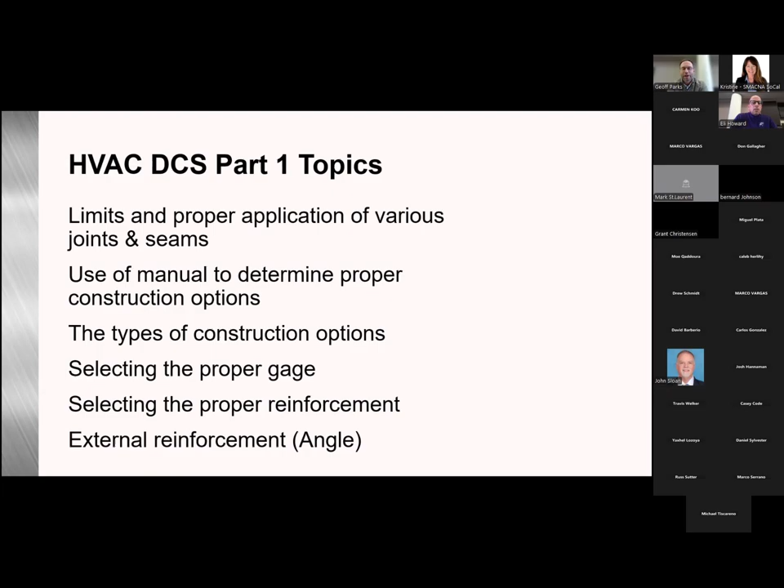HVAC duct construction standards, part one, topics. What we're going to review here: limits and proper application of various joints and seams, the use of the manual to determine proper construction options, the types of construction options that are laid out in the duct construction standards, looking to select the proper gauge based on the duct size and pressure class, all laid out in the duct standards, and selecting the proper reinforcements. For this first part, we're going to look at external reinforcement only, which would be angle.

So information required for duct construction: comprehensive duct layout indicating the sizes, design, airflow, pressure classes, and the routing of the duct system. The types of fittings to be used based on the designer's calculations of fitting loss, whether that's a square versus 45-degree entry tap, conical versus straight tap, and so forth. The use of turning vanes or splitter vanes. Locations of access doors, locations and types of control and balancing dampers, the location and types of diffusers, any requirements for duct insulation, the location and type of fire protection devices, including fire dampers, smoke dampers, combination fire smoke dampers, and ceiling dampers. This is something the building codes require - this information needs to be on the design documents submitted for building permit. And then, of course, details of any offsets required to route ductwork around obstructions, columns, beams, and so forth.

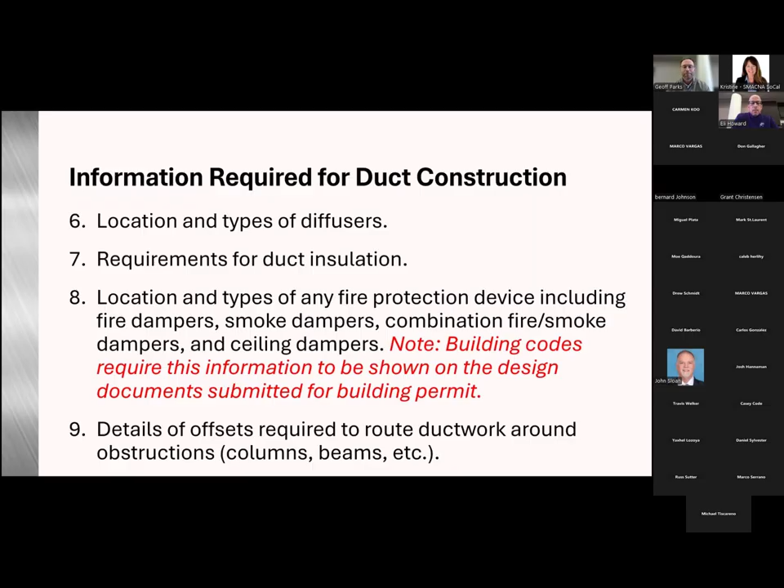So what kind of design considerations are on the engineering side? Of course, the CFM, you have your static pressure, duct size, fitting types, which we talked about. And then that static pressure will end up becoming your construction pressure class.

So on the contractor side, some duct construction considerations, of course, the pressure class, which is as specified, the panel width and height. And then with that information, we'll be able to go into the duct construction tables, find our panel thickness, the gauge, be able to select our joint type based on spacings, and then looking at any intermediate reinforcement requirements that there may be.

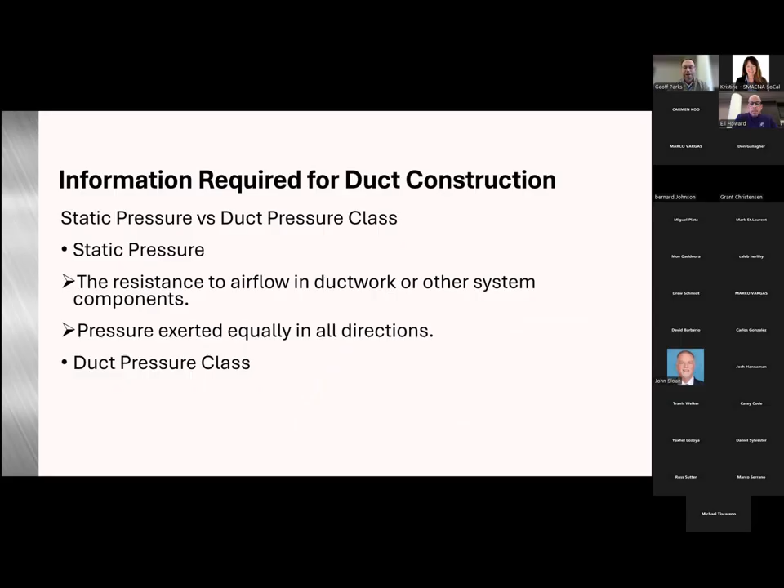So static pressure versus duct pressure class. Static pressure is the resistance to airflow in the ductwork or other system components, and this pressure is exerted equally in all directions. Duct pressure class qualifies the duct construction requirements, and then it clarifies the duct sealing requirements. Again, both of these values are determined by the professional of record.

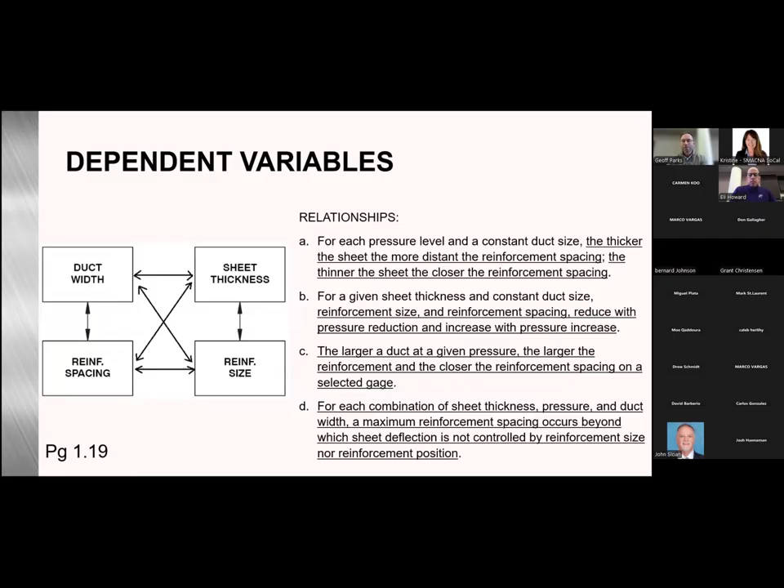Dependent variables. This is, you guys don't have books. I'm used to people having books here.

This is figure 1-2, dependent variables, and you're able to choose the combination for specific system requirements. First, maybe you're going with a thicker panel gauge, which may allow smaller reinforcement sizes or less reinforcements. Or you beef up the reinforcement, allowing a thinner panel gauge or fewer reinforcements. Or you add more reinforcements or shorten the spacing, allowing a thinner panel gauge or smaller reinforcements. These are laid out in the duct construction tables.

Just transverse joints. These are the joining of two duct sections, which can be any branch, sub-branch intersection, duct collars, taps, louvers, air terminal connections, and so on.

Here we're just showing a couple of typical rectangular transverse joints, drives, plain slips, TDC, TDF, but we're going to get into all the available options in the standard.

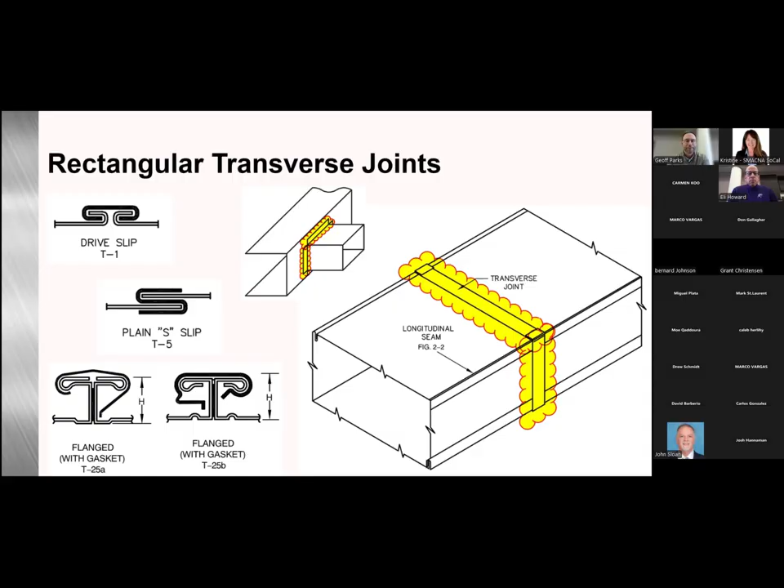Here we have figure 2-1. This is the rectangular transverse joints covered in the document. Let's dive into a couple of them.

Here we have the T1 drive slip, T3 reinforced. This is going to be a gauge no less than 2 gauges less than the ductwork. It has a minimum gauge requirement of 24 gauge, and it qualifies as a reinforcement per table 2-48, which we will look at in a little bit.

One of the reasons we've laid this table out like this within the new duct construction standard is we found that most contractors, if they made a mistake in their layout and fabrication of ductwork, it wasn't the panel gauge. It was usually taking the transverse joint beyond its usable limit listed in the standard. For example, you're not allowed to use the T1 drive slip, even reinforced, above 4-inch water gauge. So there are limitations, and we thought taking them out of the body of the manual and highlighting them would be beneficial for all contractors working with this.

If you use our duct construction app, the unique thing about it is if you put in the size of ductwork and the pressure classification, and the pressure was high enough, it would not even give you an option to use these transverse joints. It would say, you're at 4-inch water gauge, your ductwork is 60-inch by 24, you're going to be using TDC, TDF. You can't even use this joint, it wouldn't even pop up as an option. So that's where we found people were making mistakes, and that's why we focused on those couple of areas in the book and also with the duct construction app.

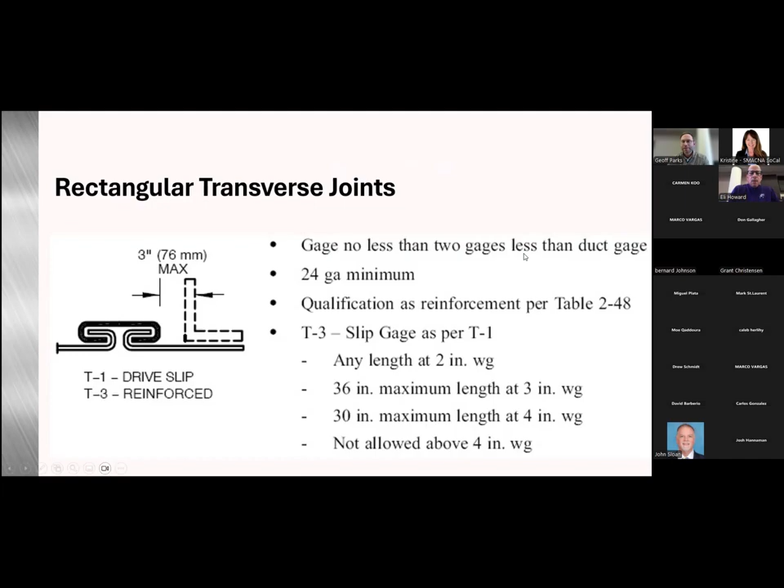Moving on with this one: this is good up to any length at 2-inch water gauge, 36-inch max length at 3-inch water gauge, 30-inch max length at 4-inch water gauge, and it's not allowed above 4-inch water gauge.

Moving on to the standing drive slip, the T2. You would want to fasten the standing portions within 2 inches of each end and elsewhere at 8-inch spacings or less. It's good at any length up to 2-inch water gauge, 36-inch max at 3-inch, 30-inch max at 4-inch, and not allowed above 4-inch water gauge.

Here we have the plain S slip, T5, as well as the T6. This one is not less than 2 gauges less than the duct gauge, 24 gauge minimum. When used on all 4 sides, you'll want to fasten within 2 inches of the corners and then at 12-inch maximum intervals. This is only good up to 2-inch water gauge maximum pressure, and as pointed out, this wouldn't even be an option if you selected 4-inch water gauge in the duct construction app.

Next we have the reinforced S slip, the T7. You would use S slips conforming to the T6, which we just reviewed, and then use a 16 gauge angle, 1x1 height, sliding it into the pocket and fastening with screws at the ends. This angle can be used for A, B, or C class rigidity, and again maxes out at 2-inch water gauge.

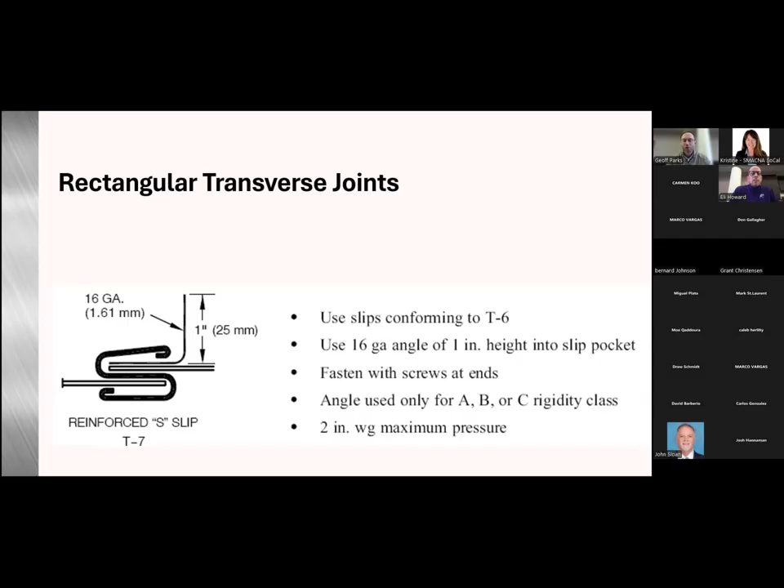Next up is our T8 double S slip, 24 gauge for 30-inch wide or less, 22 gauge over 30-inch width, and then we would fasten each section of the duct 2 inches from the corners, and then at 6-inch maximum intervals with 5/8 minimum tabs to close the corners.

What I'm showing here is table 2-47, since we were just reviewing flat slip type connections. This is the unreinforced duct table. What this table does is combine all of the unreinforced minimum duct gauges from all the tables, up to 48-inch duct width and up to 10-inch water gauge. Once I get into the duct construction tables, I'll show you the column that correlates with this table.

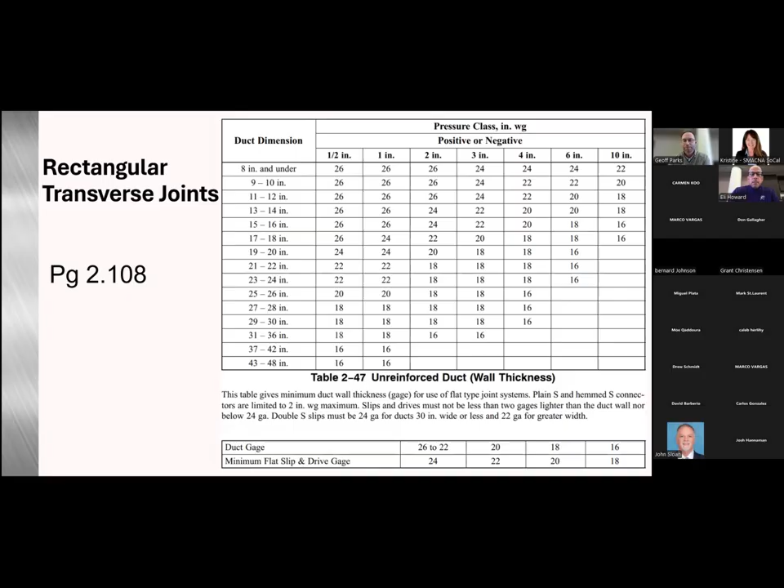Here we have table 2-47. I mentioned briefly when talking about the T1 flat drive accepted as reinforcement. For this table, based on the duct gauge that you would get from the duct construction table and the static pressure you're working with, if you're within the meat of the table and the width of the duct and reinforcement spacings work out, then this T1 flat drive would be accepted as reinforcement. I'll use this in an example coming up to further explain how it works.

Moving on with rectangular transverse joints, getting into our standing S, our T10s, T11, T12. When using on all 4 sides, you would want to fasten within 2 inches of each corner, and then at 12-inch maximum intervals. Again, this has the same limitations as the other transverse connectors we looked at: good up to any length at 2-inch water gauge, 36-inch max length at 3-inch water gauge, 30-inch max at 4-inch, and not allowed above 4-inch water gauge.

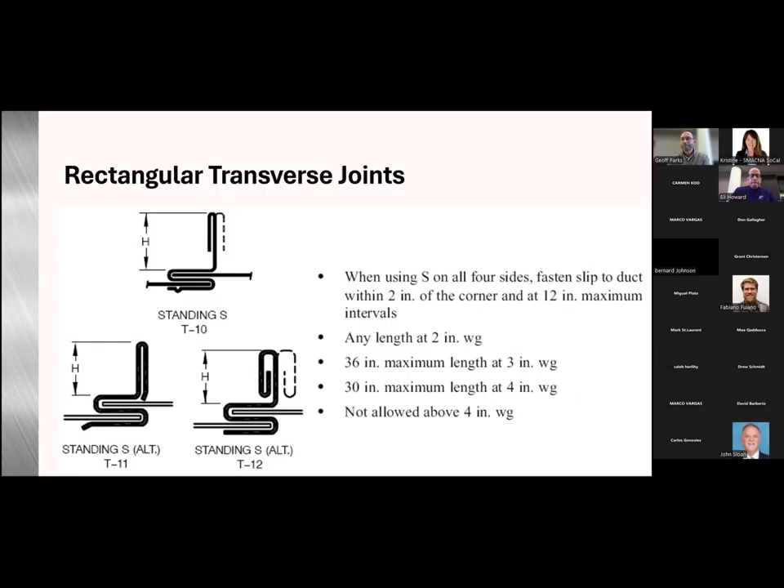Now we're looking at the T15, T16. This is our standing seam or the angle reinforced standing seam. You would button punch or otherwise fasten within 2 inches of each corner and at 6-inch maximum intervals.

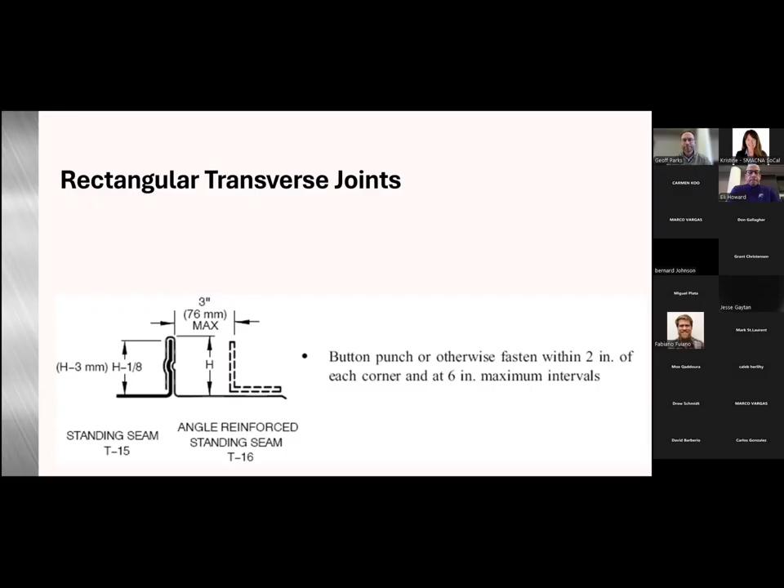One thing to note is that per the International Mechanical Code, the height maximum would be 1/2 inch for grease duct systems, type 1 grease ducts. That also applies to the UMC, because the UMC does reference NFPA 96 for kitchen grease duct systems, and they max you out at a 1/2 inch flange turnout.

Now we're looking at the T22. This is companion angles, Van Stone flanges. You're going to have a 3/8-inch minimum flange on the duct, and the angles must have welded corners. They're going to be fastened, either with tack welds, bolts, or screws to the duct wall, 2 inches from the ends, and then 12-inch maximum intervals. There's a little bolt schedule down here: 5/16 minimum diameter at 6-inch maximum spacings for 4-inch water gauge or lower. 1/8-inch angles require 4-inch maximum spacings at 4-inch water gauge, and then 4-inch maximum spacings at higher pressures.

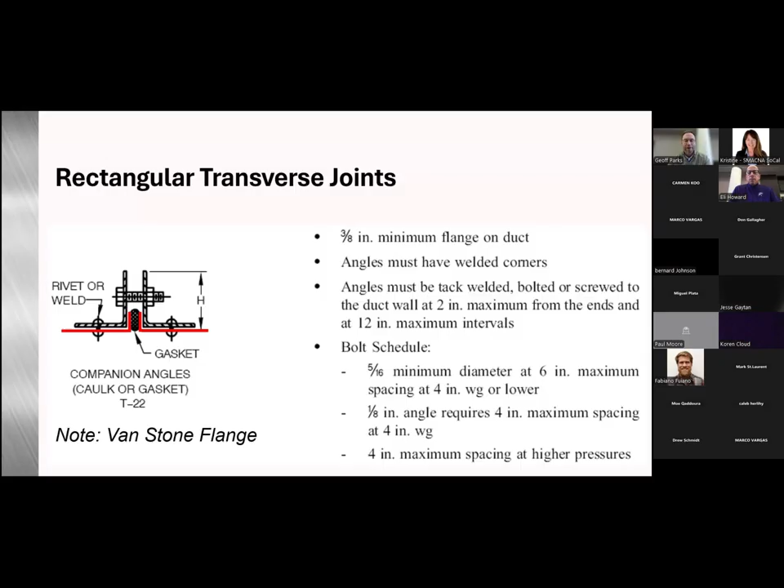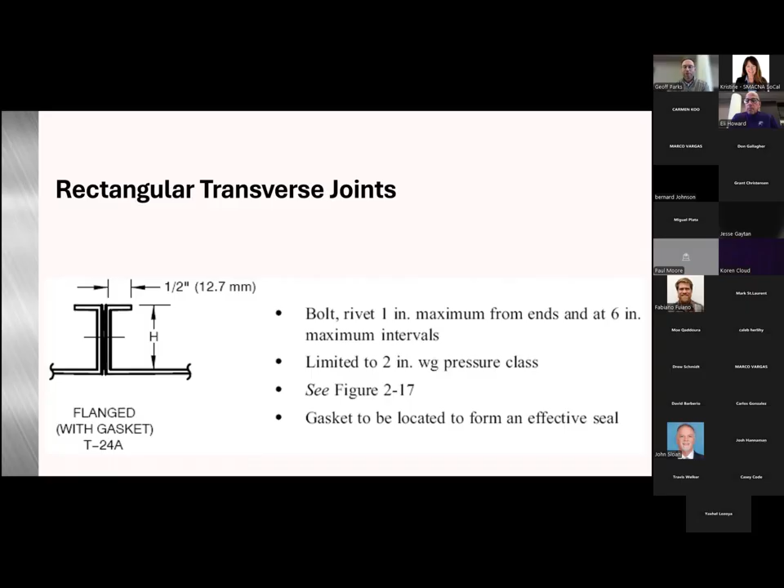Here we have the T24A. So this is T24 light, if you will. This one is limited to 2-inch water gauge, bolt rivet, 1-inch maximum from the ends, and then 6-inch maximum intervals. And we're going to follow figure 2-17 for this one as well.

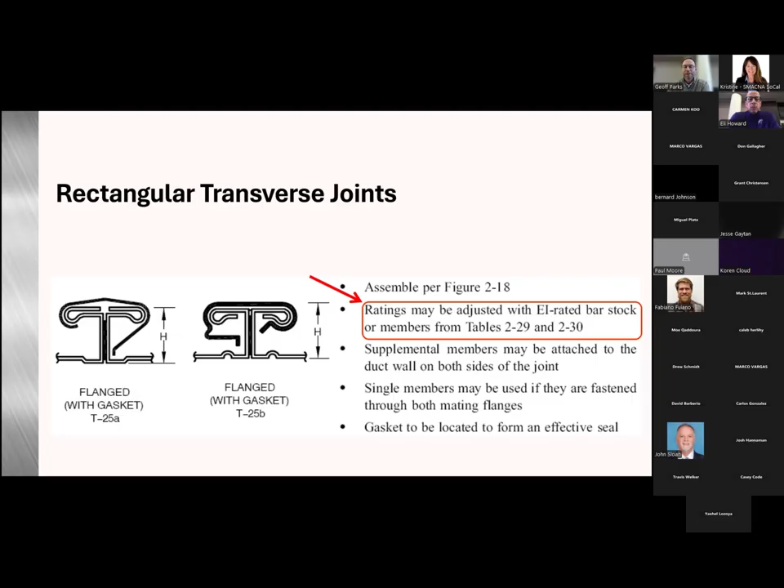Here we have the T25A, T25B. This is your TDC, TDF connection. Assembly is going to be per figure 2-18. Ratings may be adjusted with EI rated bar stock or members from tables 2-29 to 2-30. That just means you can add supplemental angle or exterior reinforcements to beef up that rating or reinforcement class for that joint. Single members may be used if they're fastened through both mating flanges, with gasket for an effective seal.

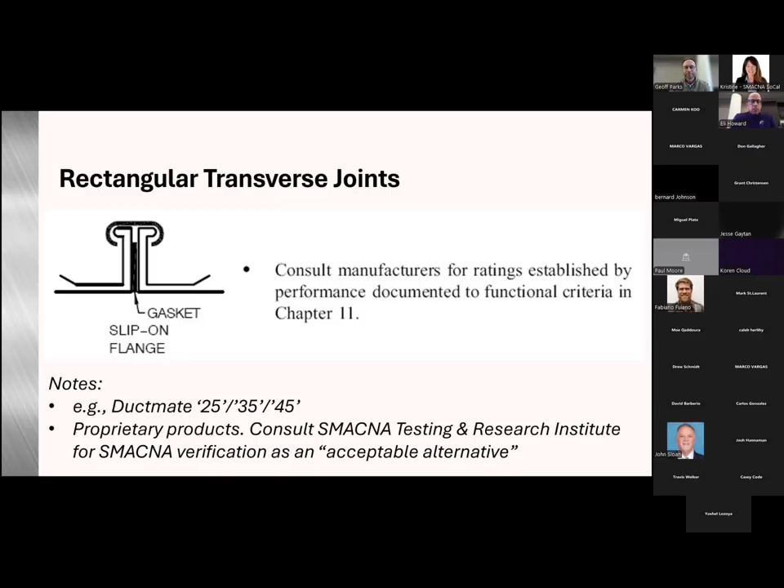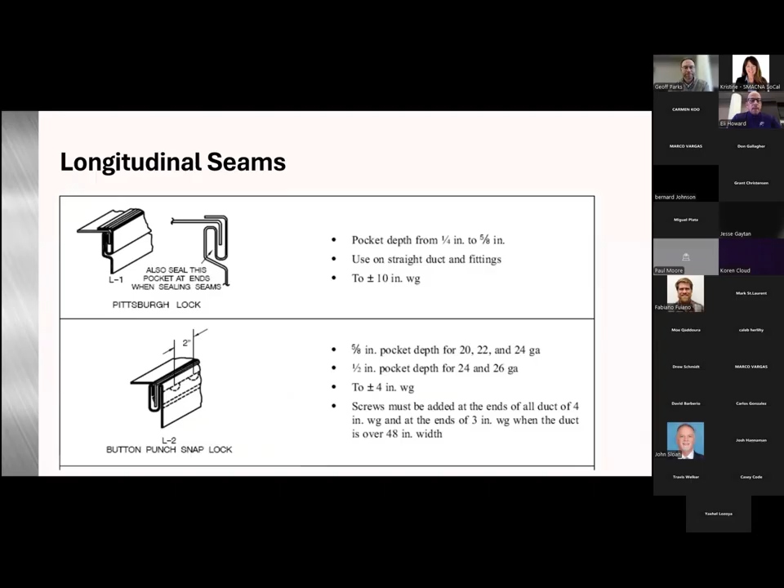Next, we have the L3 groove seam, also called the flat lock or pipe lock. Typically you would see this on round duct as well, but it can be used as a rectangular seam. And then we have the L6, excuse me, double corner seam. Both of these are good for positive or negative 10-inch water gauge.

Next, we have the L4 standing seam, good for positive or negative 10-inch water gauge, 1-inch minimum seam. This can be used on the duct interiors, and your fastening requirements are going to be 2-inch maximum from the ends, and then 8-inch max intervals.

Next, we have our L5 single corner seam. You would follow all the fastening requirements for the L4. And then next is the T25A, T25B, which can be modified for longitudinal seam applications, joining large panels or big duct. You can join that very, very efficiently with TDC, TDF.

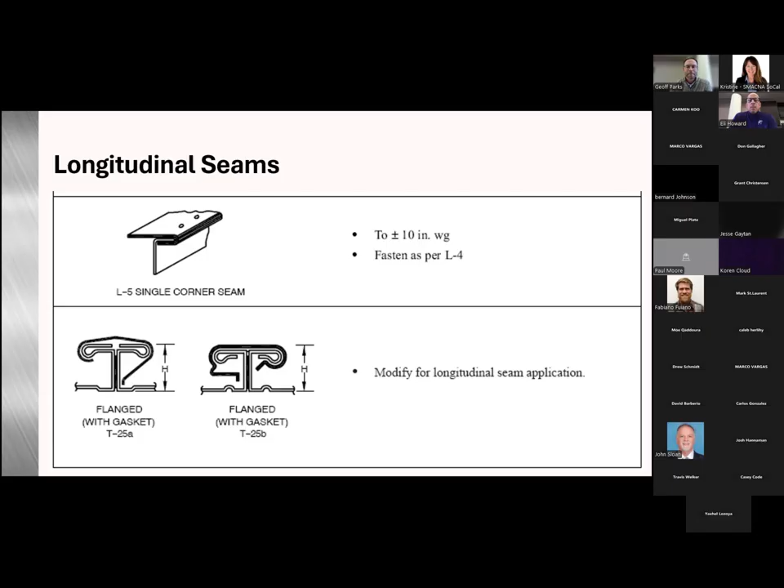All right, moving on. So we covered our joints, we covered our seams. Now we're going to look at intermediate reinforcement that's covered in the standard. This is going to be your angle, hat channel, channel Z, and then framing channel or unistrut.

And just to note, other structural shapes may be used for external reinforcements when the equivalent effective stiffener rating, that EI rating, can be demonstrated.

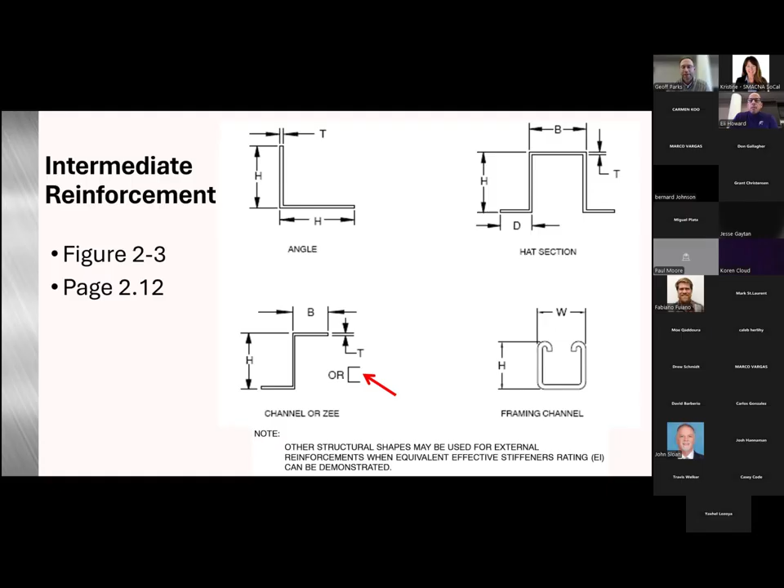So now we're going to talk about basic duct construction process. We're going to walk through the steps of how to go about building some ductwork.

So first off, you're going to want to verify the pressure class. Next, we're going to want to check the corresponding table, make sure we're looking at the correct duct construction table. From there, we would start with the larger side.

Next, we're going to determine our reinforcement spacing options, and these can either be a joint reinforcement or intermediate reinforcement. Next, we would check the joint reinforcement tables, and check any intermediate reinforcement tables if applicable.

For this part one, we're only going to look at external reinforcement. And in the next part, we would look at tie rod options for reinforcements. Then we would repeat for the short side.

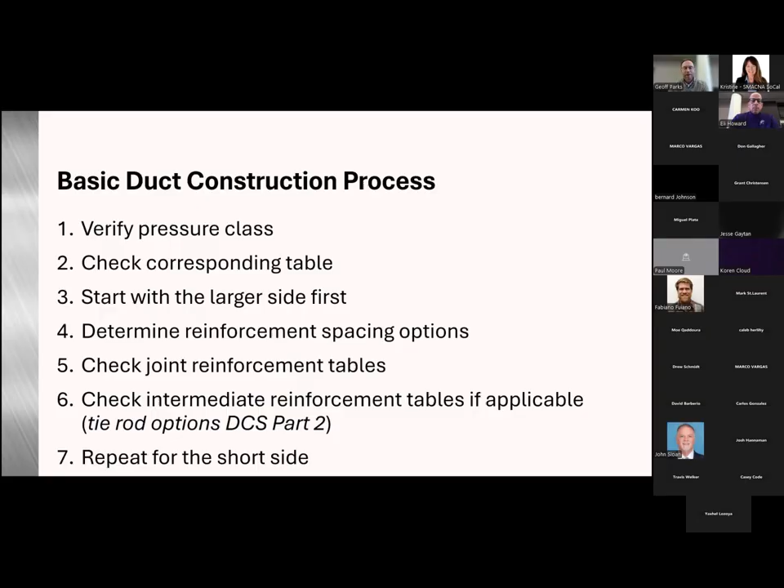So here we have the reinforcement tables guide summary. What this does is it basically spells out and tells you how to read the duct construction tables, and we'll dig into this one a little bit closer.

So first off, point out the large rectangle that's kind of encasing the circles here. We have 1, 2, 3, 4 through 10. So basically those circles are column numbers, and there's really no technical merit to them. They just identify each column.

Next, looking at the first letter in the table - hopefully you can see my mouse swirling around there - this is going to be the minimum reinforcement class required. And then the number in the box, that's going to be the minimum gauge based on the reinforcement spacing that you select, which in this case, we're looking at the highlighted ones, and that's going to be the 8-foot reinforcement spacing options.

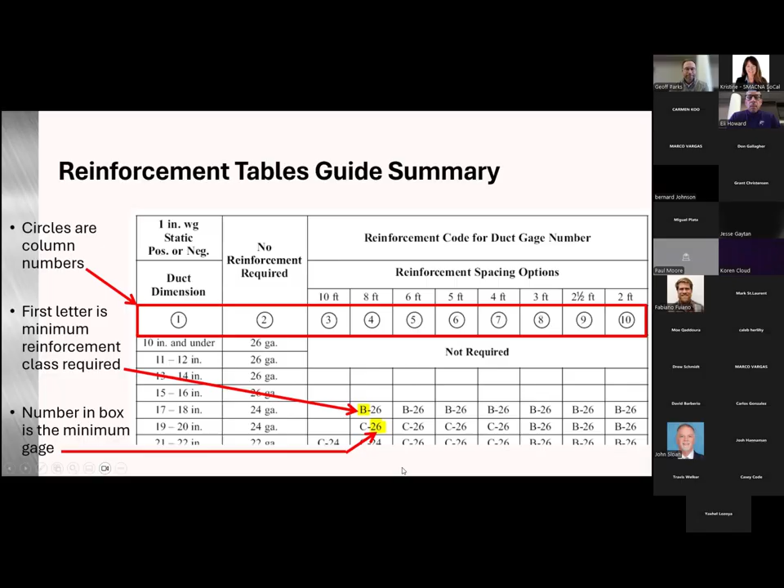So digging into the tables a little bit more, if you see a second letter, that is a downsized reinforcement when tie rods are added. So you could downgrade or downsize from an I reinforcement to a G reinforcement, highlighted here, with adding a tie rod. And then down in the lower right-hand corner, we have a KT - that T means a tie rod is required for that to qualify as a reinforcement.

So kind of summing up what's in the box and the tables. This one, we have an H20G. This means that the minimum panel gauge is going to be 20. The reinforcement required is an H at the spacing noted at the top of the column, and again, this can be a joint or intermediate reinforcement. And then the second letter, which is the G, means that you can downsize from an H if you use a tie rod as well.

And I'll say that I think there's an example that I'll be able to point out. But if to achieve a G class you're already required to use a tie rod, then that option would not be available. I'll make sure I point that out when we get into a couple examples here.

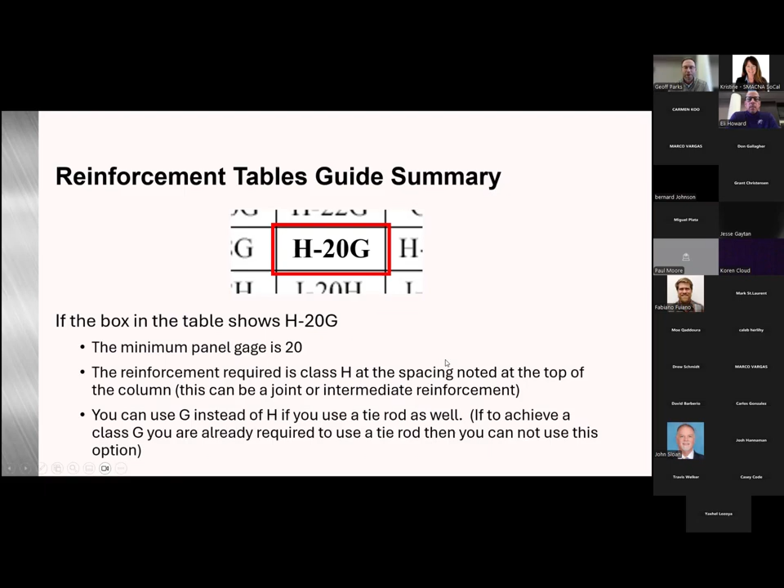So what we're going to do is just quickly review what we just went over, looking at an actual duct construction table. This is the 2-inch water gauge, and this is good for positive or negative pressure. Here we have our column headers.

The second column in, this is the no reinforcement required. So this column at the gauge shown wouldn't require any additional reinforcements. And again, this ties back to the other table that I showed that kind of correlated all of the no reinforcement required gauges for the 2-inch up to 10-inch water gauge as well.

Next, we have our reinforcement spacing options, 10 foot, 8 foot, 6 foot, down to 2 foot.

So for a quick example, say you have a 24 by 24 duct, you go 18 gauge, no additional reinforcements would be required. But let's say we don't want to build 18 gauge, so we're going to look at 5 foot joints. This is saying, hey, we can get away with 26 gauge, but we have to add something every 5 feet. And what this table is telling you, the box is telling you, you need a D class reinforcement every 5 feet to go down to the 26 gauge from the 18 gauge.

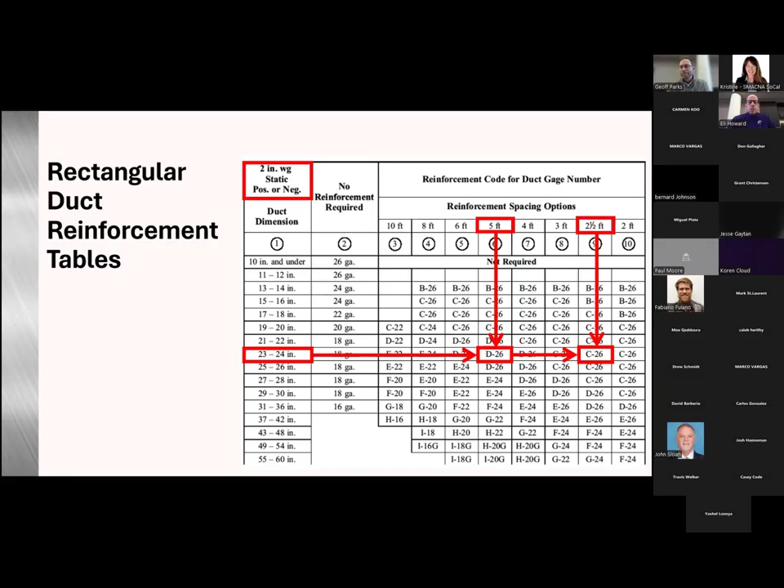And then we can look at it further by going to the intermediate or mid panel. So now we've reduced to a C class, going every 2.5 feet versus the 5 feet.

So quickly, I'll just come back to this dependent variables. What we just went through was a progression of changing variables. Originally, we had our 18 gauge. We looked at adding reinforcements, so we went to the 5 foot, dropped us from 18 to 26. And then further shortening up that reinforcement spacing down to 2.5, we were able to drop from a D to a C class reinforcement. So this is just kind of the progression of changing variables.

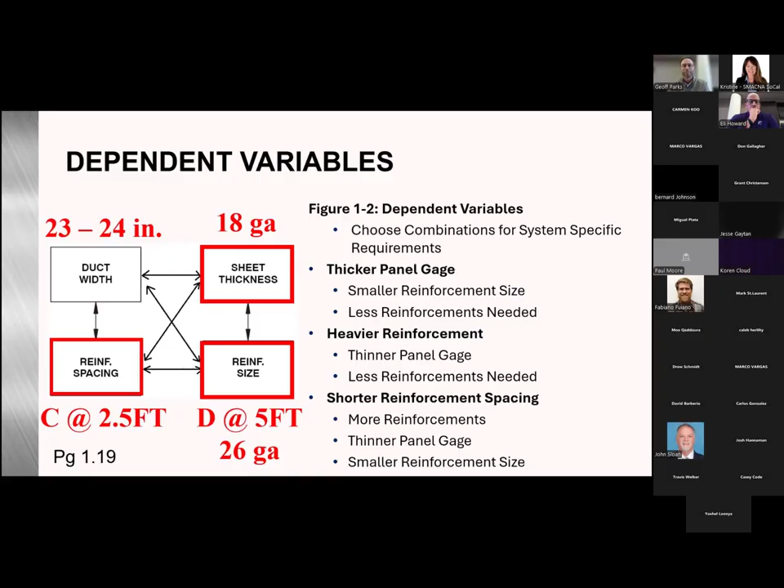And then here we have, I'm just showing, basically your 6 foot would be a 3 foot mid panel, 5 foot would be 2.5, 4 foot would be 2, and so on.

Okay, so now we're going to look at joint reinforcements. This is table 2-31. It covers all transverse joints that qualify as a reinforcement, except for the T1 drive.

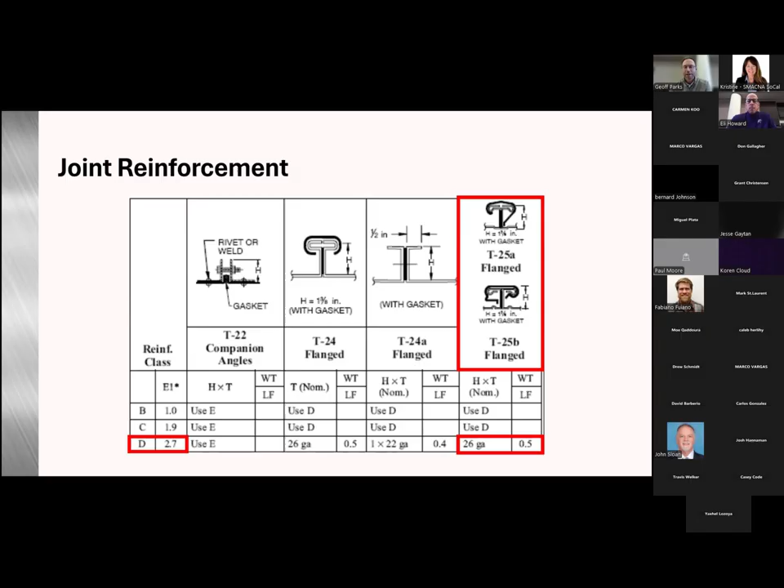A couple other things to point out. If you see a plus sign in parentheses, this means that option is only available for positive pressure only. If you see a capital R in parentheses, this means that a tie rod is required for that joint

So now that we've kind of walked through pretty quickly a bunch of the duct construction tables, how to read them, joints, and so on, we're going to get into an example.

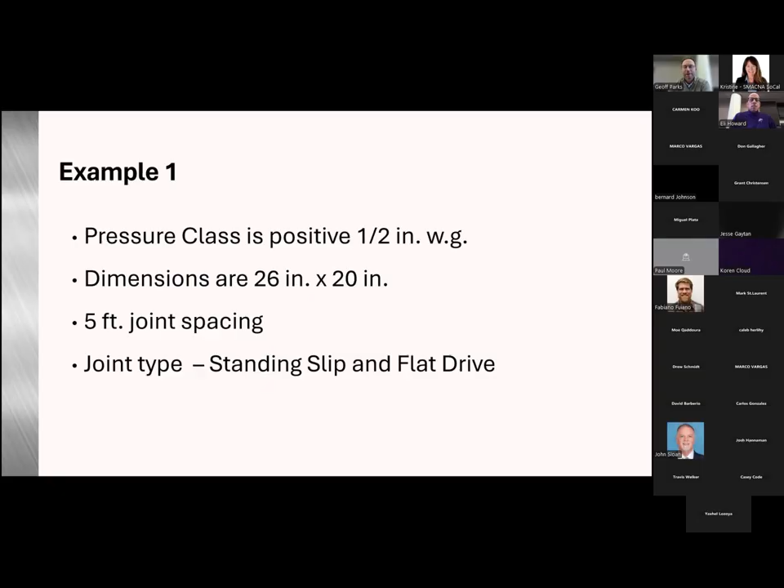So here we have a positive pressure half-inch water gauge system. We have a duct dimension of 26 by 20. We're going to be building 5-foot joints, and the joint type is going to be a standing slip and then a flat drive.

So what we're going to do is make sure we go to the correct table. This is going to be table 2-1, our half-inch water gauge. We're going to check our large side first, which is the 26-inch.

Right out of the bat, we can see that if we build it out of 20 gauge, no additional reinforcements would be required. And we could make really any joint length that's feasible. So there's no joint length restriction with this at this gauge.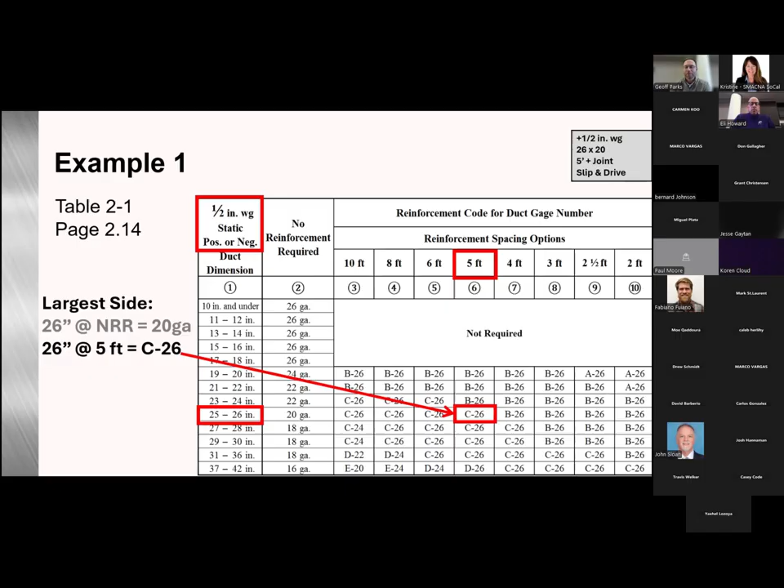But most everybody's going to build a 5-foot joint. We're building a 5-foot joint for this example. So we're going to look at the 5-foot reinforcement spacing column. What this is coming up to is a C26. So we would need a C-class reinforcement every 5 feet, minimum duct gauge 26.

So now looking at the short side, the 20-inch, no reinforcement required would be 24 gauge. Our 5-foot reinforcement spacing option is going to be 26 gauge with a B-class reinforcement. So B class, 26 gauge.

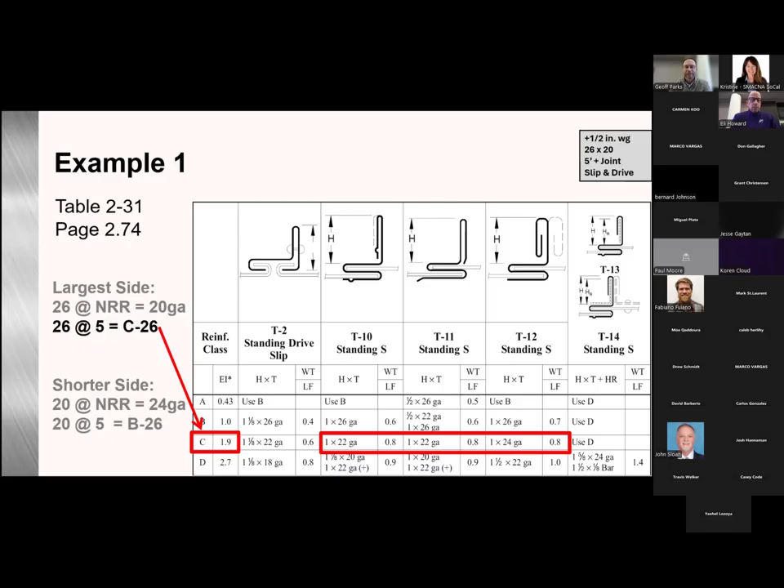So now that we know that from the duct construction table, we need to go to table 2-31, check out our joint reinforcement table. We need to find out what qualifies as a C class. So what we have here for the 26-inch side are a couple options on the T10, T11, T12. Any of those options would be available to qualify as a C class at 5 foot.

Now looking at the T1 drive slip side, I mentioned earlier that this qualifies as a joint reinforcement per table 2-48. So now we're going to jump back to that table to see if we qualify.

So here's 2-48. We're looking at our short side, which is the 20-inch side. It's a B26, 26 gauge is the column we would look at. And then we can see that up to 20-inch width panel at a maximum 10-foot reinforcement spacing, this would qualify and be accepted as a reinforcement.

If we drop down to 18-inch duct, say it was 26 by 18, no reinforcements would be required, and it would be acceptable as well.

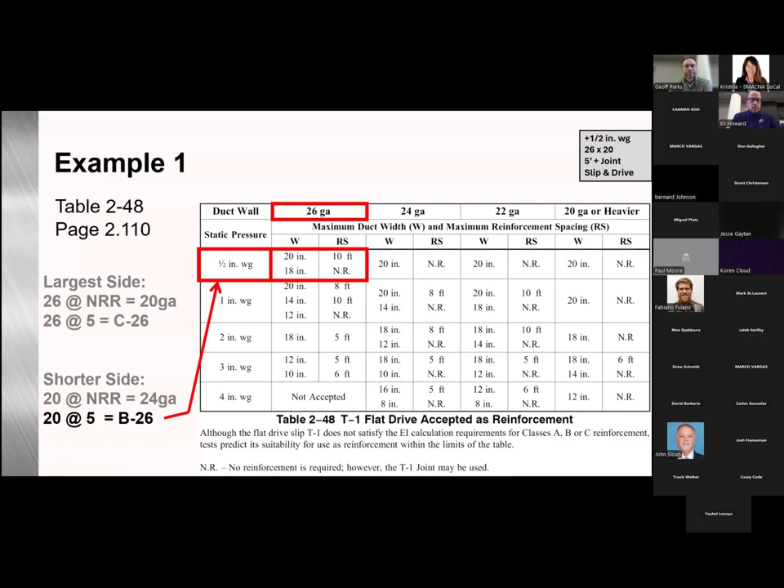So our solution for this first example: option 1 would be build it at 20 gauge, no additional reinforcements would be required. Option 2, we could build it at 26 gauge with a joint reinforcement spacing of 5 feet, and then that joint reinforcement for the 26-inch side would be a C class.

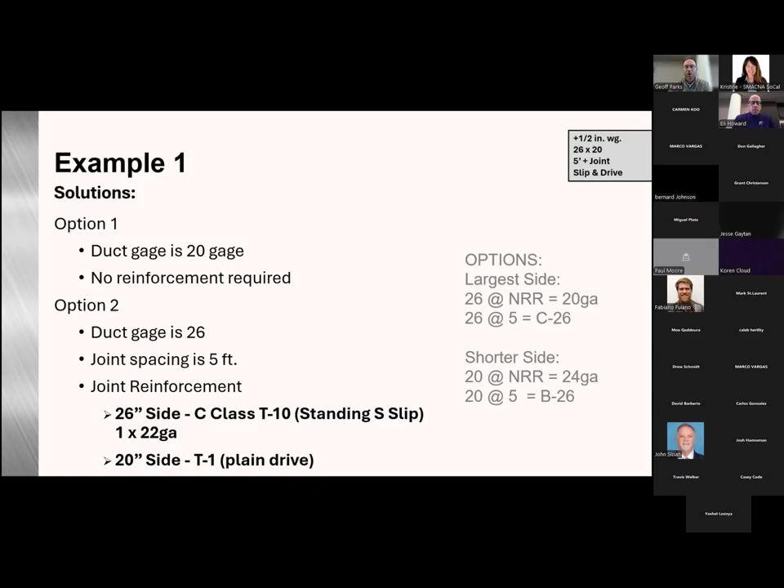T10 standing S slip would be 1 by 22 gauge. And then on the 20-inch side, the T1, we could use the plain drive since we qualified that in table 2-48.

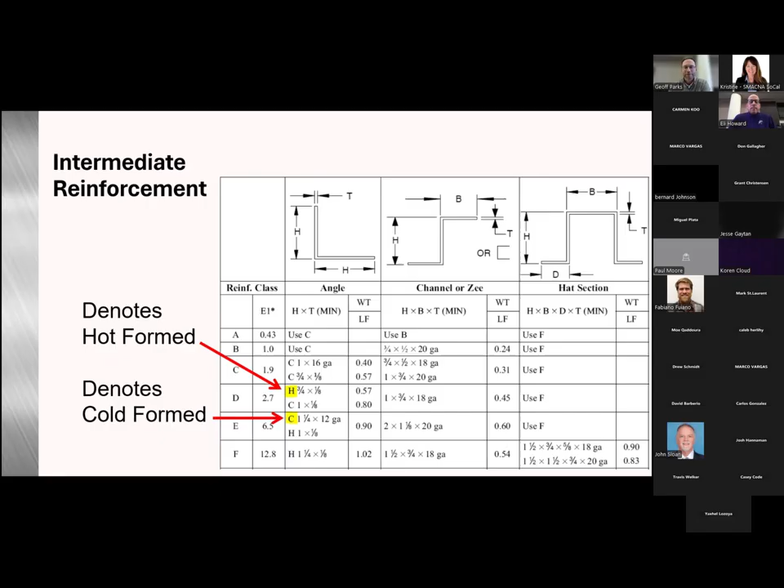All right, so now we're going to look at example 2. This time we're bumping up the pressure class. We're going up to 2-inch water gauge, getting a little bit bigger duct here. We're going to look at some 60 by 26, 5-foot joints, TDC, TDF, and no internal reinforcement, simply because we're just looking at external for this first part.

So now we're going to jump to table 2-3. This is our 2-inch water gauge table. You want to make sure you're always looking at the right table, because that has happened before—people have thought they were building it off the right table, and lo and behold, they didn't. So always verify you're on the right table.

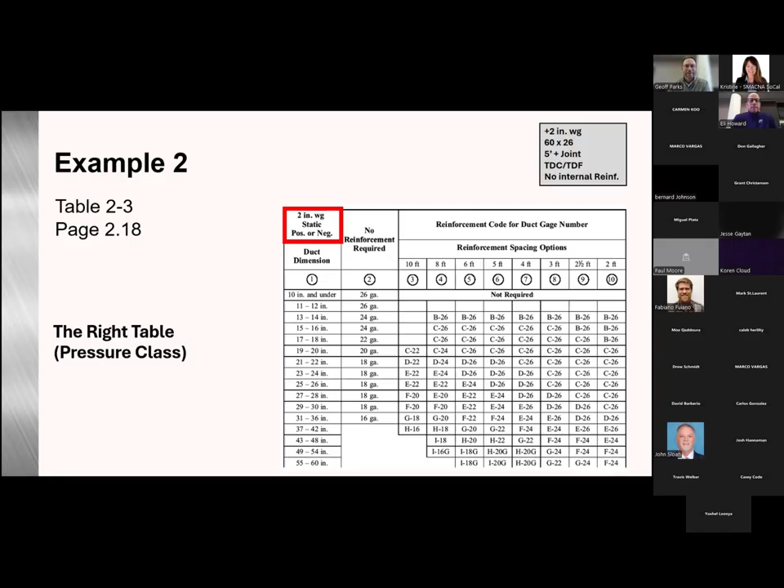So now we're going to look at our long side first, 5-foot joints. This 60-inch side is telling us we need an I-20G. And then we could also look at our intermediate or mid panel, which would be the 2.5-foot reinforcement spacing. And that's telling us we would need a G24 in the green box there.

So now we're going to jump to our joint reinforcement table, table 2-32. We're going to check our TDC, TDF, see what the minimum requirements are for the I. And that's telling us that it's a 20 gauge with internal reinforcement—that's that R in parentheses.

So for this example—whoops, I went the wrong way—we are avoiding internal reinforcements or tie rods purposely. So we would look at the 2.5-foot spacing. That was a G24 from the table. And that's telling us, hey, we need 20 gauge. So you can see the duct construction table said at 2.5-foot spacing it's a G24, but when you come to the joint reinforcement table, the minimum gauge is going to have to be 20. So that would supersede the duct construction table. And since it's a formed on flange, you would have to build the duct out of 20 gauge.

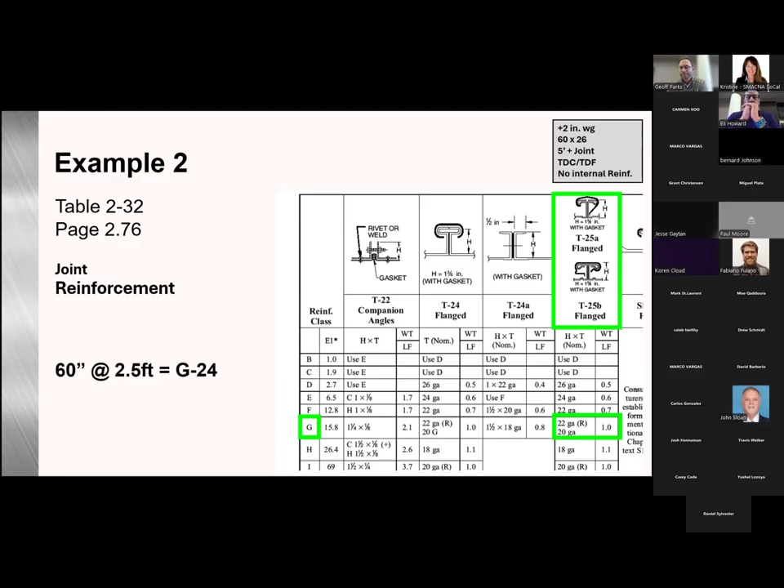So since we're building a 5-foot joint and we're looking at now the 2.5-foot spacing, we're going to need something in the middle. So on the 60-inch side, we would go to table 2-29. This is our intermediate reinforcement table. And we would select from the G row for any of those types, either the angle, channel, Z, or hat section, and any of those would qualify as a G reinforcement.

For this example, we're going to pick the 1.5 by 1.5 by 1/8 inch angle. And if we jumped quickly to table 2-30, this is the framing channel or strut table that I mentioned earlier, where we could substitute a framing channel for an external angle or hat channel from table 2-29. So for this one, we would need a 1 3/8 by 1 5/8, 12 gauge.

So we've looked at the larger side. Now we're going to look at the short side, which was 26 inches. 5 foot spacing is going to be D26. 2.5 foot spacing is going to be the C26.

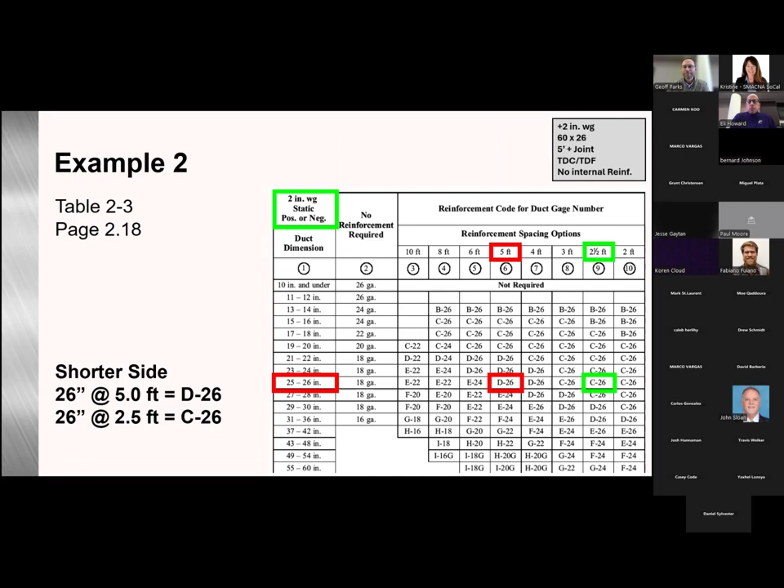Again, we're going to jump to our table 2-32, our joint reinforcement table, and check out what those requirements are. So for a C, it says use D. So the D is going to be minimum 26 gauge for that TDC, TDF to qualify as a joint reinforcement.

So our example 2 solution is going to be the duct gauge is going to be 20 gauge. Our joint spacing is going to be 5 feet, or 56 1/4 inch, using TDC, TDF as our transverse joint. Our intermediate reinforcement, at the midpoint of that joint, is going to be a G class angle, 1.5 by 1.5 by 1/8 inch. And the 26 inch side is not going to require any additional reinforcement above the TDC, TDF at the 5 foot spacing.

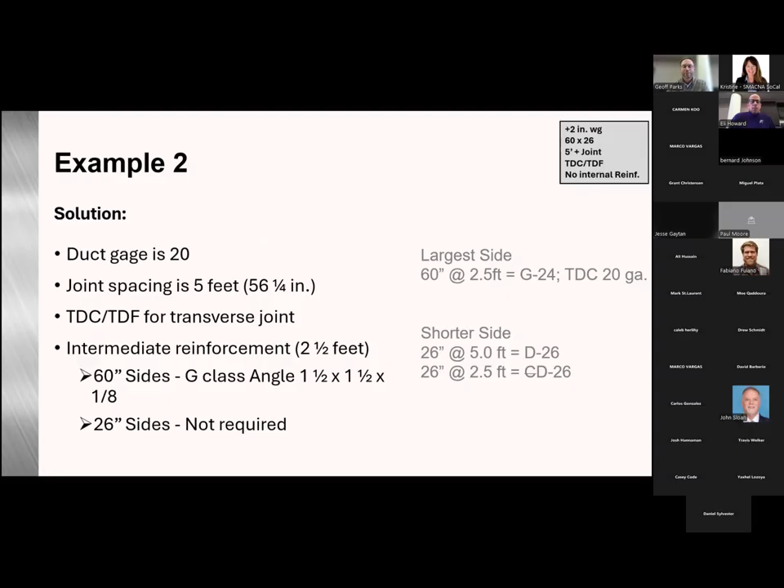Couple notes on external reinforcement. The reinforcement intervals do not need to coincide. At 4 inch positive pressure and above, the reinforcement must be end-tied. And external reinforcement must be fastened within 2 inches from the corner unless tied. Our maximum fastener spacing is going to be 12 inches.

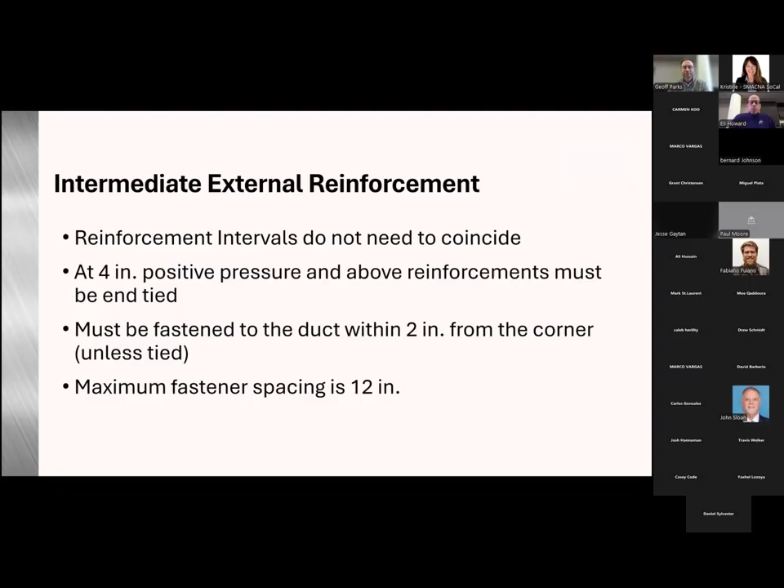So here's figure 2-11 out of the standard. This is just indicating reinforcement on 2 sides, which is basically what we just went through on our example 2. Same scenario here.

When reinforced on 2 sides, again, at 4 inch water gauge and up, positive pressure only, end ties would be required. So one of those options would be a 1/4 inch tie rod.

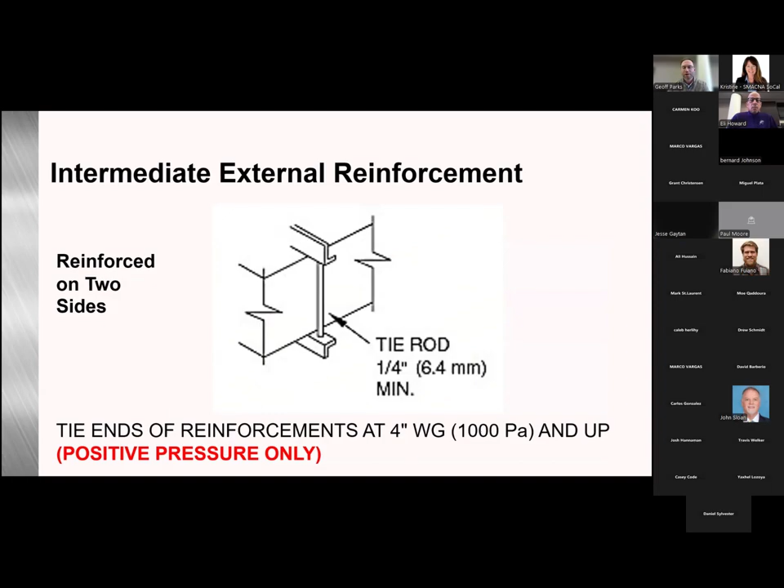And then reinforcements on all 4 sides. This is figure 2-12, just indicating the requirements when reinforcements on all 4 sides are required.

And then the other end tie option, instead of the angle or the tie rod, would be 1.5 by 1.5 12 gauge angle.

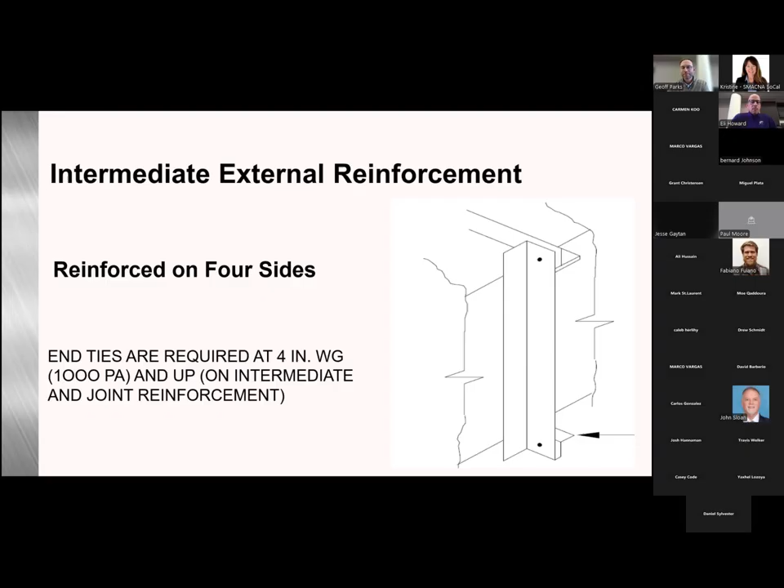This is different than industrial ductwork, where we would be looking at what we call fixed or unfixed corners with the way the angle has to be attached, because instead of looking at pressure, which is in our duct construction standard, we're just looking at air flowing through the ductwork and what the pressure is. In the industrial standard, we're looking at not only the air pressure going through, we're looking at the material going through. And instead of calculating deflection, we got to calculate what's called buckling of the panels, which is much different. So the industrial standard will be different than what you see here in the commercial standard.

And then quickly, just pointing out, I mentioned that the reinforcements do not need to coincide. So here you could have 2-foot spacings on your top panel and bottom panel, and then your side panels can have 3-foot spacings. Those do not have to coincide, and it ties into what Eli was talking about, having a fixed or unfixed reinforcement.

On occasion, we get this question, usually only a couple, 3 times a year, where maybe the contractor has missed his panel gauge. Per the standard, using TDC, TDF, we said it was supposed to be 22, and they used 24, and they've been called out. What we can do is, if you give us the duct dimensions and what you have done, we can show you how to remediate that ductwork that's hanging there without pulling anything down.

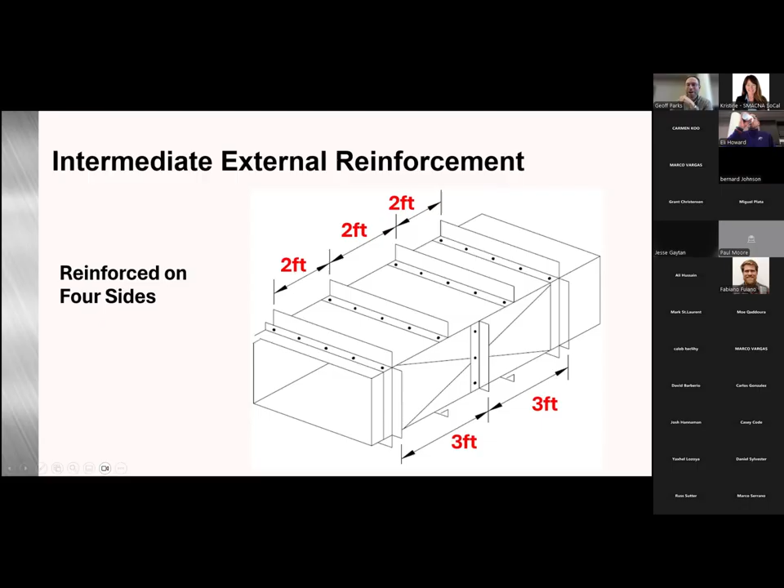So I do have one more example to go through on this part 1, but I'm going to skip that out of respect for time. We have a half hour left, so I'm going to skip part 2 content here to get into the internal reinforcements and some other stuff we wanted to cover today. So with that, if there are no objections, hearing none...

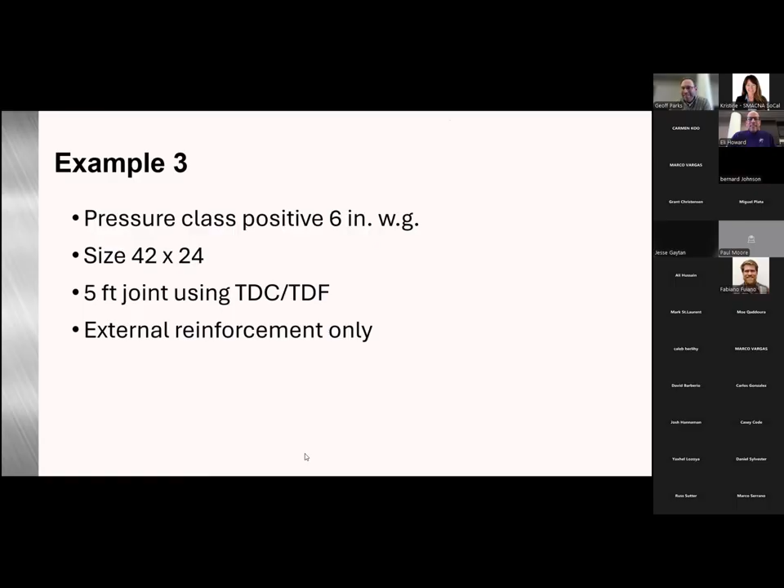Let's see, bear with me. Doing it live is always fun.

All right, hopefully everybody can see my screen, and I'm showing part 2. Good, okay, perfect, so you didn't miss much on the last example. It was just going through another TDC, TDF build, but I wanted to be respectful of time and also get some of this other information out there as well.

So for part 2, we're going to look at proper tie rod use, positive and negative pressure procedures for using the TDC, TDF tables, how to fab large duct over 120, which we've been getting a lot of lately, how to convert aluminum construction, which I may gloss over depending on time, duct liner, and double wall duct. I'd like to really focus on the first three for the time we have left.

So tie rods, this can be steel rod, threaded, unthreaded, partially threaded, conduit, or steel pipe. Strap can be used as well, under positive pressure applications only. And then very rarely, if any, in the HVAC duct construction standards, you can use angle as well.

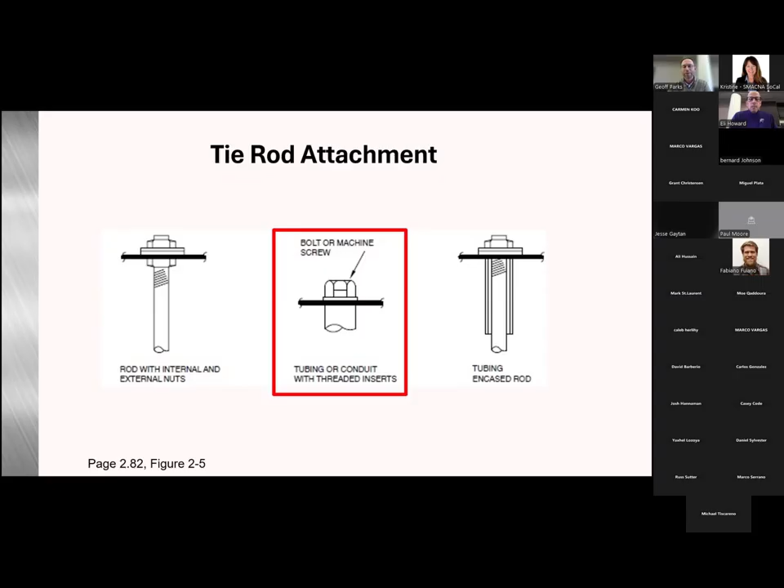Here we have this from figure 2-5, kind of throwing out a couple options for the tie rod attachments: rod with internal and external nuts, tubing encased rod. And then the middle section, that's going to be probably 99% of the contractors out there using the bolt, machine screw, tubing or conduit with threaded inserts.

Here's figure 2-5, these are some other alternatives. You can use a tie rod with a bent foot, 1-inch foot, welded to the duct wall. The bottom two are your strap options, and again, these are for positive pressure service only. In very, very, very rare scenarios, we have the upper right-hand corner, which would be the G detail, which is a plate with a pretty sizable rod, I guess, if you will.

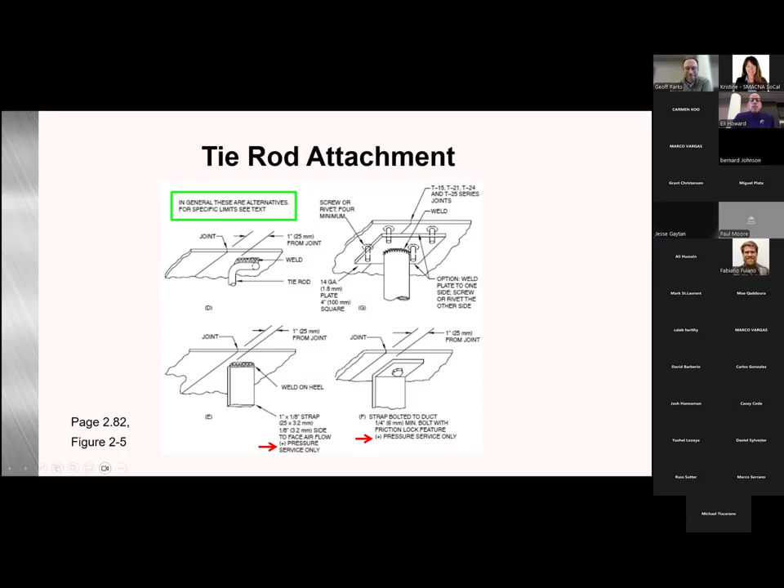So tie rod attachments, moving on, figure 2-6. When you're using a tie rod at the joint, it's going to be within 1 inch maximum of the joint. These are for joint types T21, 24, and T25, unless angle or Z channel is used as a backup.

And in general, for most TDC, TDF applications with tie rods, you're going to have a tie rod on both sides. We did tests years ago with just removing one tie rod, and what we found at 2-inch water gauge, the non-tie rodded side just pulls up too much on a deflection standpoint. So if you're dealing with 1-inch water gauge, you could maybe get away with one tie rod on one side, but it's just not typically done. You're going to be with 2 tie rods, or a tie rod per side, I should say.

Yeah, general application, you're using one at each joint, or two, depending on how many are needed. But we'll get into that.

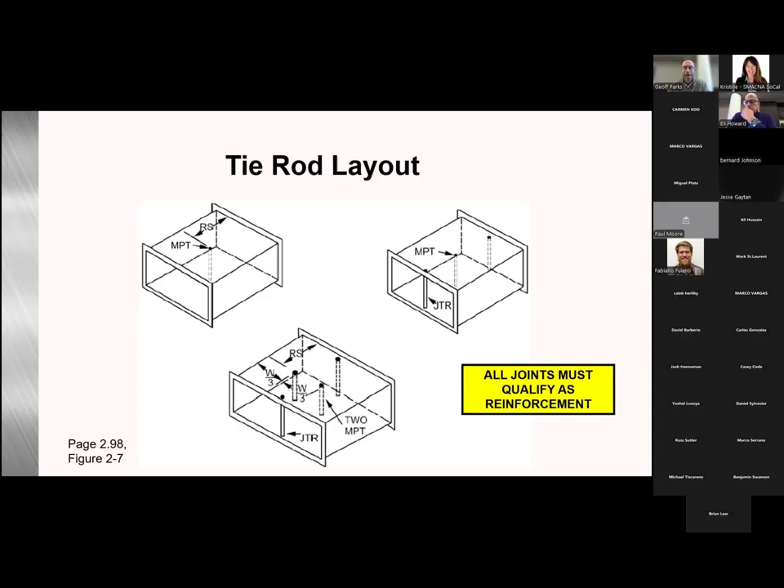Some notes on mid-panel tie rods. They can be an alternate to external intermediate reinforcement up to 96-inch duct widths, and I believe 6-inch water gauge, and applicable up to 6-foot joints. So you can have a 6-foot joint, 96 by 96, 6-inch water gauge or less, and you could replace an external reinforcement with a tie rod. The transverse joints must already qualify as reinforcements for that to be conforming to the standard.

Tie rods are prohibited, so you would not use them in underground or under slab applications. Do not use if the air velocity is greater than 2,500 feet per minute. That's not because of any structural issues, it's more to do with noise. And you wouldn't want to use them where condensation can collect, unless the penetration is sealed watertight at the tie rod connections to the panel.

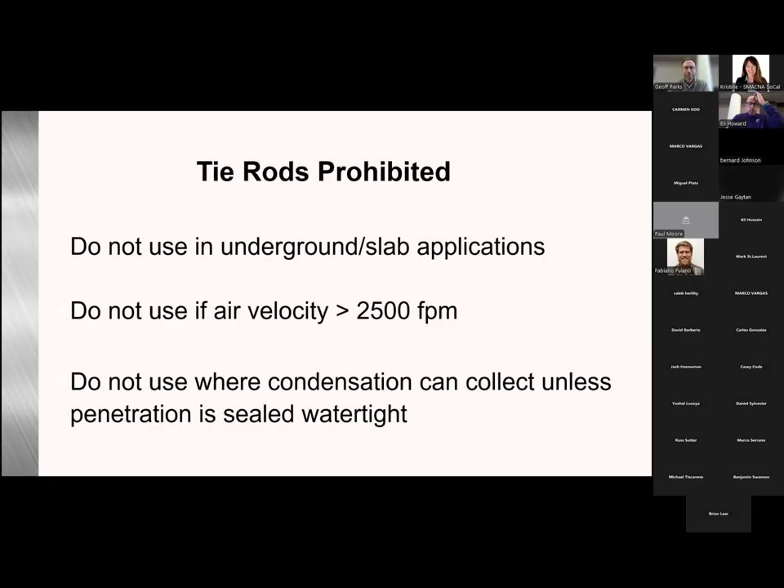Do not use in grease ducts. This is per code. The collection of grease and fire is very real with anything inside a type 1 grease duct system. And if tie rods occur in 2 directions in the same vicinity, they must be prevented from touching or be permanently attached. This applies to both the joint tie rods, the JTRs, and the mid-panel tie rods, the MPTs.

Now we're going to get into an example. This one's going to be a positive 4-inch water gauge. Our duct dimensions are going to be 36 by 24, 5-foot spacing, TDC, TDF. And for this example, we want to use tie rods.

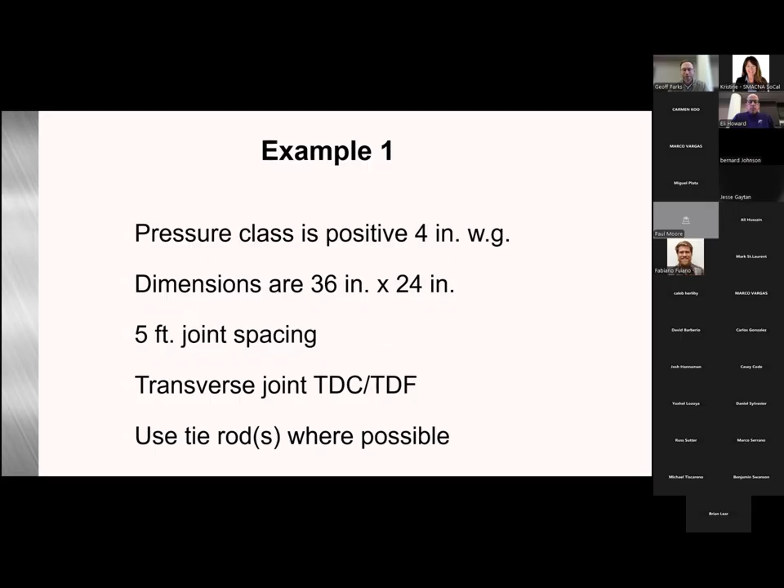We want to make sure we're on the right table, so we check our pressure class. Here we have table 2-5, this is our 4-inch water gauge table. We're going to look at the larger side first, so we're looking at the 36-inch. We have our 5-foot reinforcement spacing, and that's telling us we need an H20. And again, we would look at our 2.5-foot spacing option with the 5-foot joint, and we could drop down to an F26 for this one.

So here we would jump to our joint reinforcement table, this is table 2-32. We're going to check our H20 requirement. For the TDC, TDF joint to qualify as an H, we would need to bump it up to 18 gauge. That's what this table is telling us, even though the duct construction table said 20 gauge, we would need to bump up to 18.

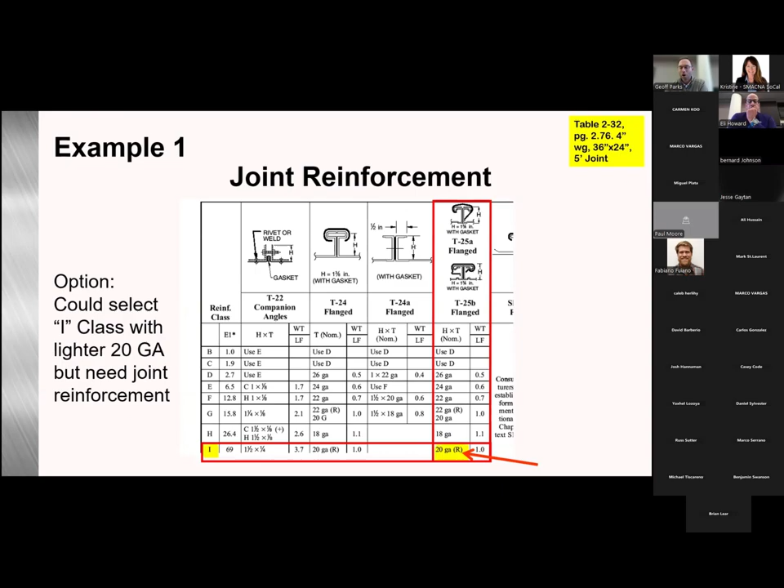Now our other option, we could select the I class with a lighter 20 gauge, but we would need a joint reinforcement. So the I class 20 R is telling us we can use 20 gauge, but we have to have an internal tie rod at this. That's what the R requirement is.

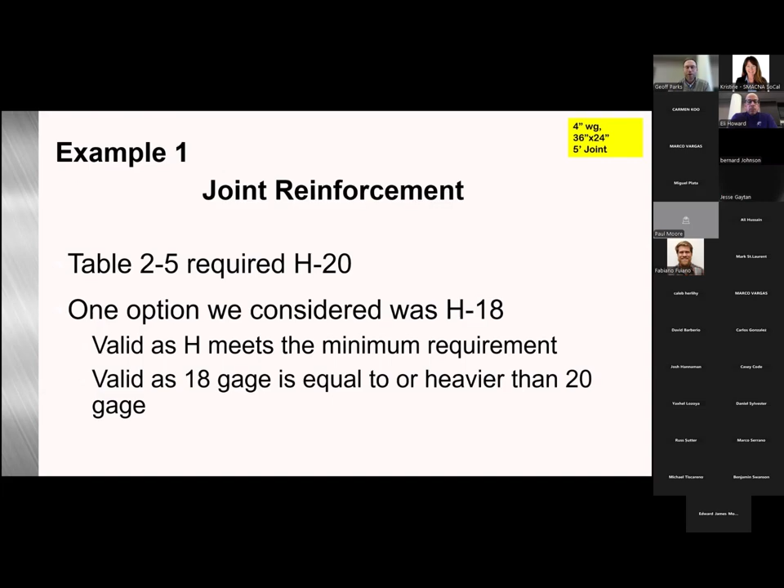So table 2-5 required an H20. One option was the H18. It's valid because the H meets the minimum requirement, and the 18 gauge is equal to or heavier than the 20 gauge. The next option is the I20, and that's valid because I exceeds the requirement of the H, and it's valid because the 20 gauge meets the minimum required in the table. But again, we would need to add a joint reinforcement.

So what if we considered intermediate reinforcement? Table 2-5 indicated an F26 at the 2.5-foot reinforcement spacing. We'll check that out, so jump back to table 2-32. For an F requirement at 2.5-foot spacing, the F would need to be a minimum of 22 gauge.

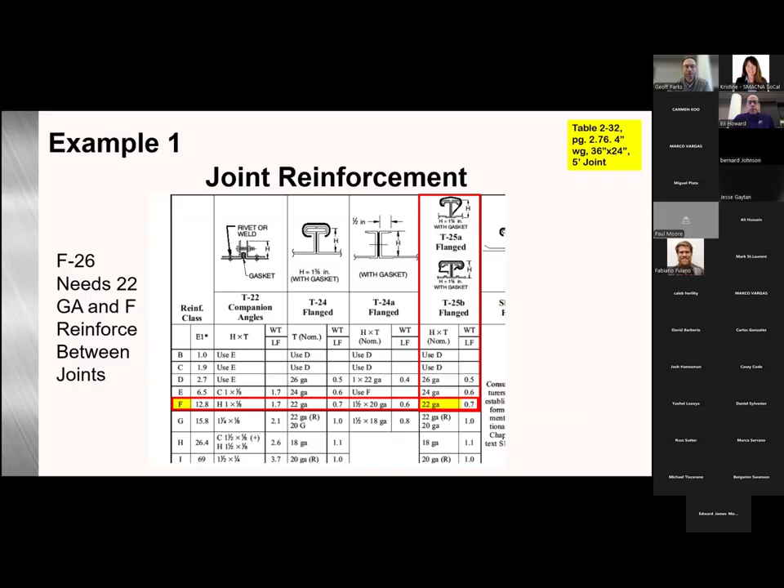So a couple questions here. Can we use a mid-panel tie rod in place of an external reinforcement? The answer is yes, with some caveats, up to 96-inch, 6-inch water gauge. How many would we need, and what size should they be? So we're going to look into all that.

Here's our mid-panel tie rod schedule, this is table 2-41. This is when we would use this table when we want a tie rod to replace an external reinforcement. Again, this table maxes out at 96-inch duct and 6-inch water gauge.

So if we dig into the table a little bit more, we were looking at an F26 at 2.5-foot reinforcement spacing with 22 gauge. So we would go to the proper reinforcement spacing, 2.5 foot, and our duct width up to 48 inches would require one tie rod. That's the highlighted portion in the middle of the screen: up to 48-inch wide duct, one tie rod will be required with a duct panel of 22 gauge.

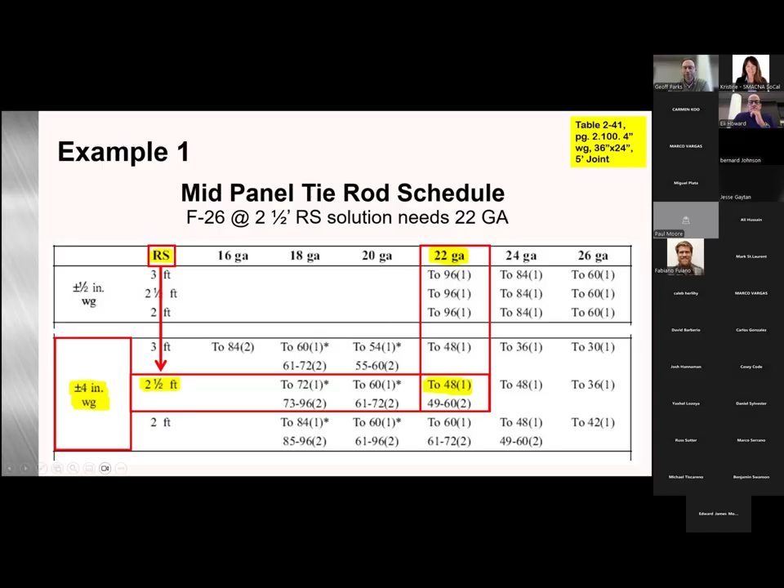Now that we know how many are required, we need to determine what load that tie rod is going to see.

So we would go to table 2-46. With this table, we need to find the load on a tie rod for 36-inch wide duct and 2.5-foot reinforcement spacing. We don't exactly have 36-inch, so we go to the closest that's not less than, which is 37-inch. Looking at the 2.5-foot reinforcement spacing at 4-inch water gauge, our load is going to be 154 pounds on that tie rod.

So now we know we need one, we know what the load on that is, and we need to size it.

For positive pressure using EMT conduit, up to 900 pounds a 1/2 inch will be good. 3/4 inch is going to be 1,340 pounds, and 1 inch is going to be 1,980 pounds. So really most anything that you're going to build in the HVAC duct construction standards is going to fall within this 1/2 inch EMT conduit load range.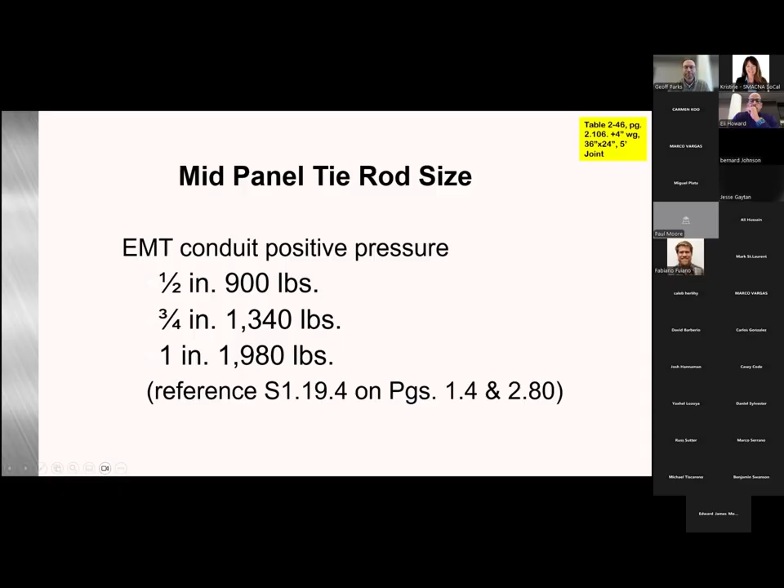So now we've checked out the larger side. We're going to now check the short side. We're back to our 4-inch water gauge table 2-5: E22 for our 5-foot reinforcement, or D26 for our 2.5-foot reinforcement spacing.

Jump into table 2-32. We look at our D and E requirements, which at 2.5 foot is going to be a minimum 26 gauge. And then our 5-foot reinforcement, the E22, means that we need a minimum of 24 gauge, but the table is telling us 22 gauge.

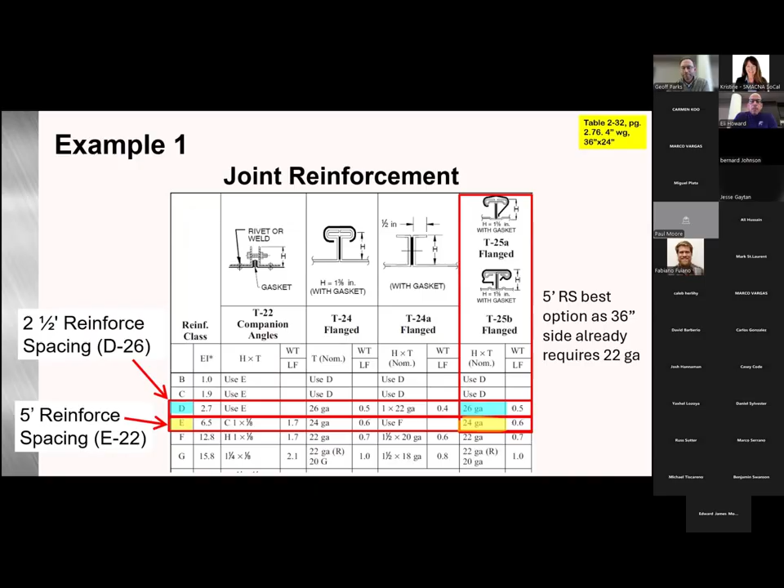So our example 1 solution is going to be: we're building the duct at 22 gauge, 5-foot joints, TDC, TDF. Our intermediate reinforcement on the 36-inch side is going to be 2.5 feet spacing. We would need 1 MPT, so 1 mid-panel tie rod, 1/2 inch EMT, because our load rating is 900 pounds and we only needed 154. And then no MPT would be required on the 24-inch side.

And our other option, we also could have used 20 gauge and a JTR.

So a couple notes on negative pressure tie rods. For these, negative pressure uses special tables, different tables depending on EMT, RC rigid conduit, or just rod. The main concern is going to be buckling, and shorter lengths are going to be allowed compared to positive pressure. Table 2-38 covers EMT, and that would be page 2.91 of the standard.

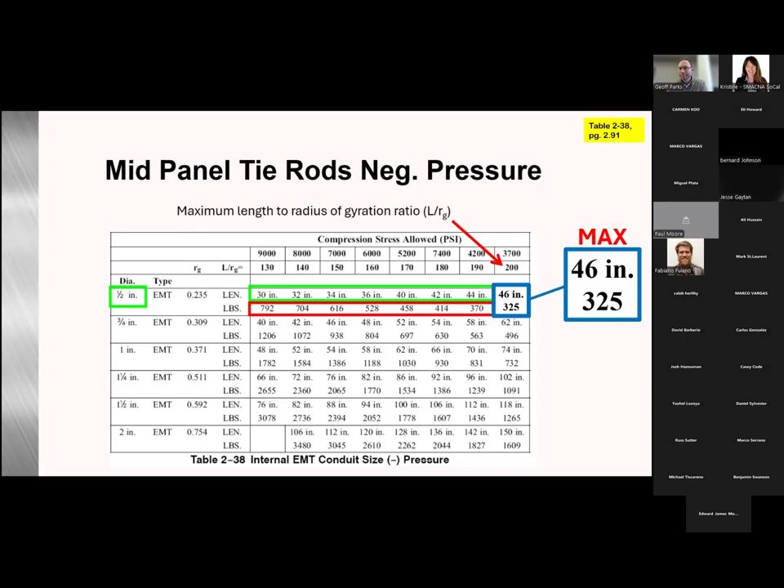Moving into that, so to manually calculate tie rod loads without using any of the tables - let's say you don't have the tables, or you just want to try it for fun, sitting at home on a weekend and want to calculate some tie rod loads.

Here you go. For this one, we have a 48-inch wide duct, 24-inch high, 24 gauge. Our reinforcement spacing is going to be 28 inches, at 4-inch water gauge.

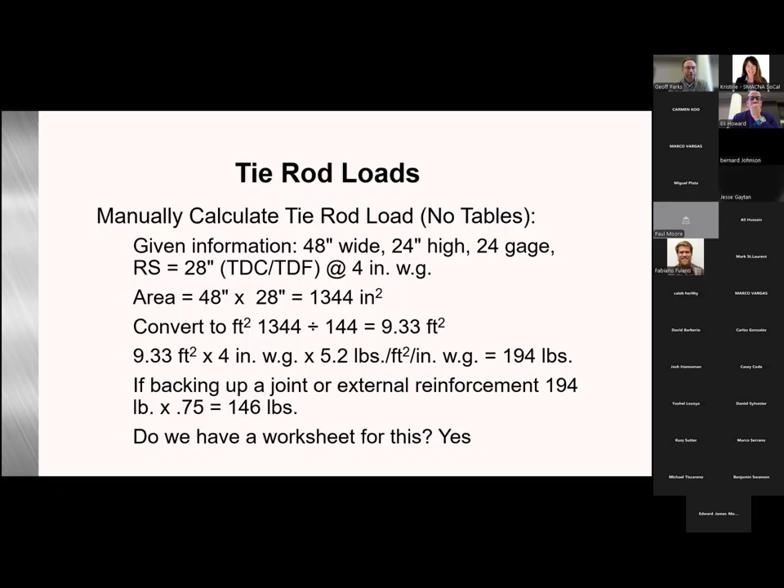Do we have a worksheet for this? Yes, and we'll make sure that worksheet's in the package we send, but here's the worksheet that Geoff's going to walk you through right now.

And the formula for this is W times RS, which is duct width times reinforcement spacing, divided by 144, times P, which is your pressure, times 5.2, and that equals your tie rod total load.

Any questions on tie rods? We just received one in, but we got that squared away for everybody to see on the application of the native tables 2.5 versus our TDC TDF tables 2.19. We broke out the TDC TDF and made those separate tables just for ease of use for our members that are just using TDC and TDF as their transverse joints.

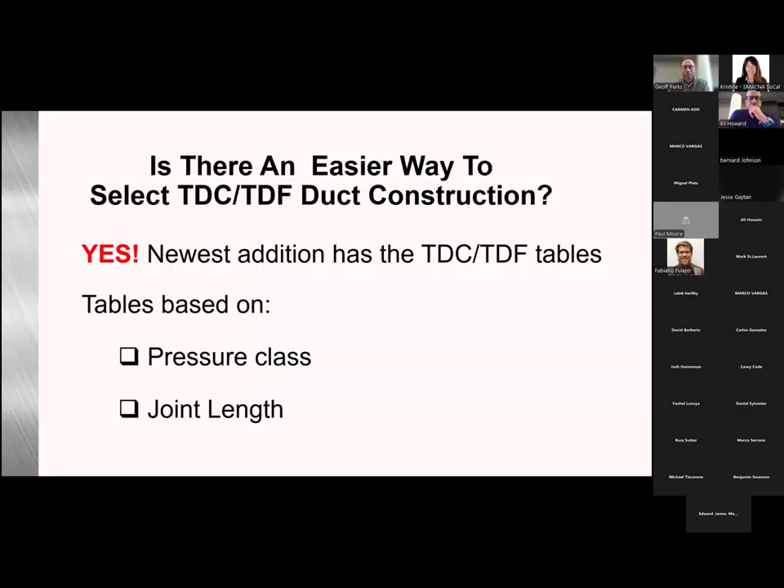Oh well, that's our next segment. Is there an easier way? Yes, so the newest edition has TDC, TDF tables - I'm getting the 5-minute warning here - and it's based on pressure class and joint length. So I'll get through this one example using those tables here.

So we're going to revisit example 1 using the TDC, TDF tables. I won't belabor you with what it is. We're looking at 36 by 24, on table 2-19, 4-inch static pressure.

The thing I do want to point out about these tables, the TDC, TDF tables, is they're kind of like 2 or maybe even 3 tables in one. You can mix and match between the 5-foot joint side or the 5-foot joint with 2.5-foot reinforcements. But for this one, we're looking at the left-hand side, 5-foot joints. And you can see it easily gives us the solution, using the native tables we had to go through a bunch of steps to get to.

So now it's saying, hey, for a 36-inch wide duct, you need a minimum 20 gauge with a JTR. Or you can have an alternate joint reinforcement, which would be 2E class reinforcements - that's an alternate. I just want to point that out.

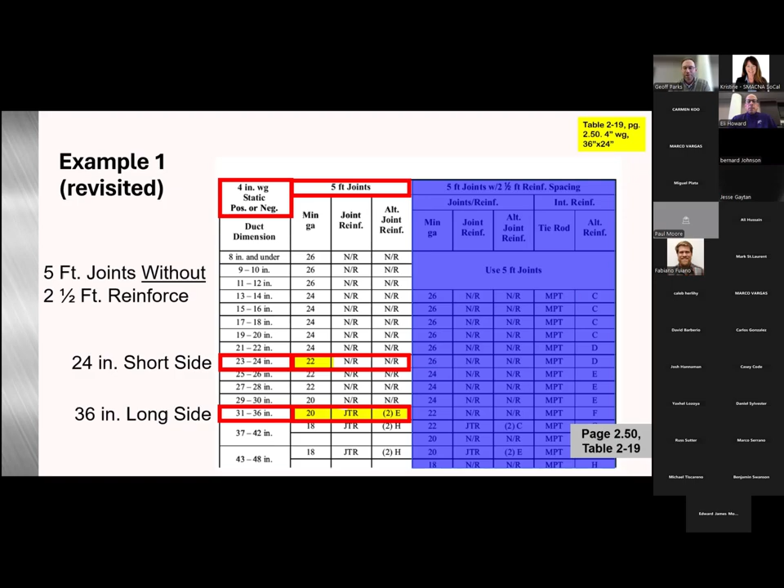And if we looked at the other side of the table, 5-foot with 2.5-foot reinforcements, we would come to the same solution that we went through at length on the first example. So our 36-inch side is going to be 22 gauge with an MPT, and our alternate would be an F class reinforcement. And then the short side for this is going to be 26 gauge with an MPT on the 24-inch side.

And again, like I mentioned, you can mix and match depending on the long side and the short side, whichever works best for your shop and minimizes the need for internal or external reinforcements. You can mix and match between the two sides.

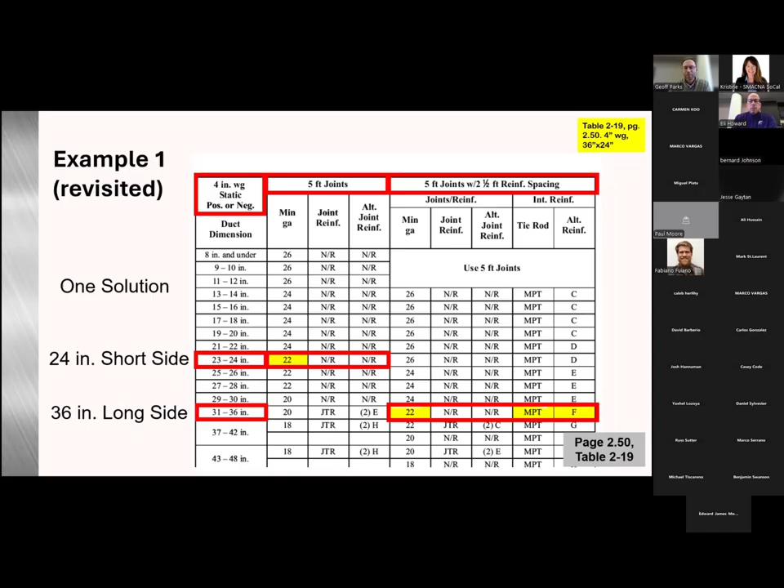So this other solution, if we built it at 22 gauge, we would need a mid-panel tie rod for the 36-inch side, and the short side would not require any additional reinforcements. So using this one table pretty quickly, we can come up with 4 options out of that one table. We just pretty much covered the 4 options, so I'm not going to read all of that off to you again.

With the time we have left, I'd like to jump over to large HVAC ductwork. This is anything over 120. You would go to figure 2-14. Within that figure, we had table 2-49 that gives you - we'll look at that really quick - your panel gauge, reinforcement size and spacings. And for any side that's not above 120, you can use the standard tables in the duct construction standard.

A couple things to point out: for duct over 120, tie rods are required at every joint and every intermediate reinforcement, so there's no option to not have that. If you're dealing with a project where you cannot use tie rods, then we would have to go into the industrial duct construction standard.

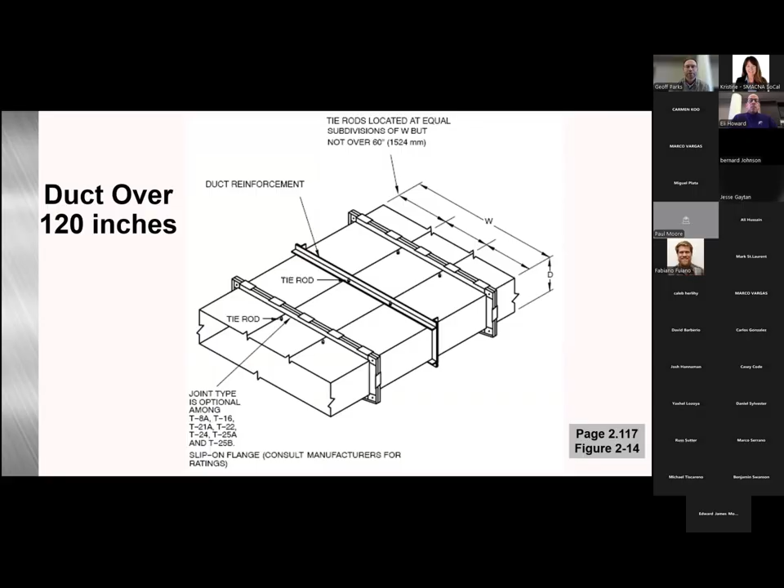So looking at table 2-49, this is on figure 2-14. This gives us our water gauge, 1/2 inch up to 10-inch water gauge, for positive or negative pressure.

Our reinforcement size - you'll note in particular, all of them have the T requirement, which means tie rods are required. Most are 2.5-foot reinforcement spacings until you get to the 6-inch and 10-inch water gauge, then that shortens up to 2 foot. So you're either building 5-foot joints or 4-foot joints at that point.

And your maximum tie rod spacing is going to be 5 foot until you get to the 10-inch water gauge, and then you're looking at 4 foot. This would be equally spaced amongst the width of the ductwork.

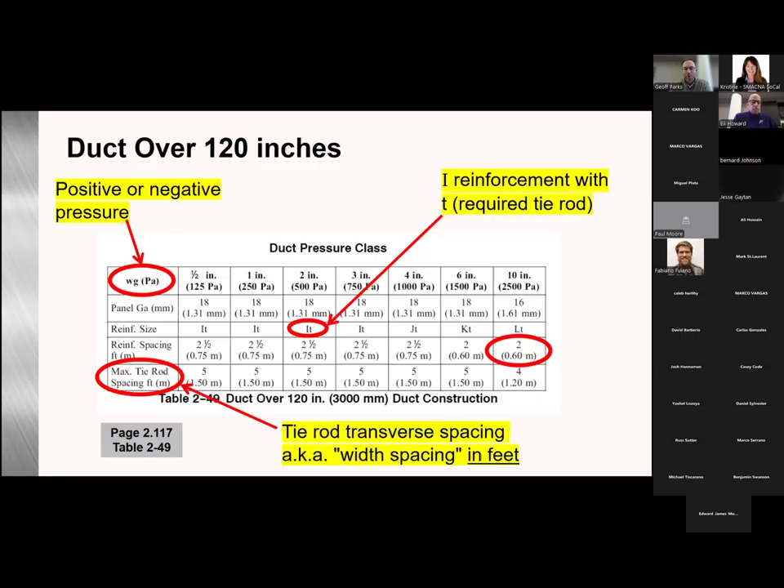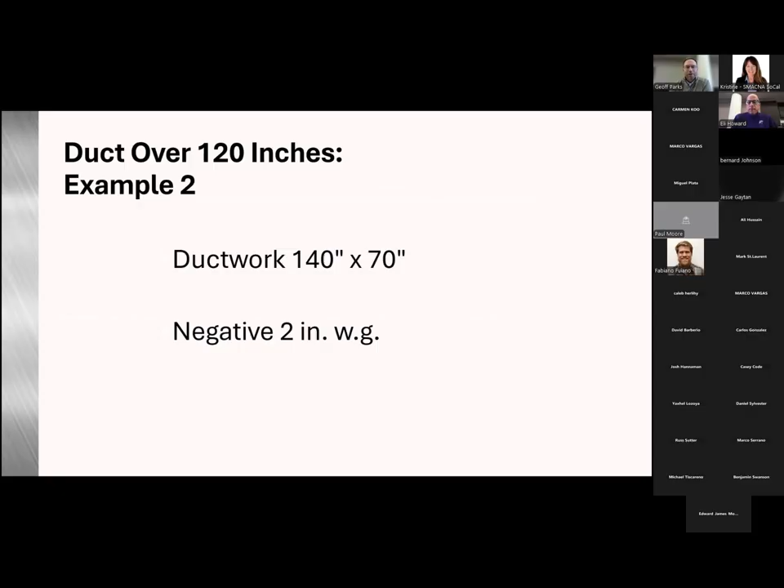Do we have time for an example, or are we pretty much out? We could go for a few more minutes, I think. Okay, let's run this quick example. All right, so if we're building a 140 by 70, 2-inch water gauge duct, we're going to jump to table 2-49.

This table is pretty simple. It's telling us, hey, panel gauge is going to be 18. Our reinforcement size is an IT. Our reinforcement spacing is going to be 2.5 feet. And then our max tie rod spacing is going to be 5 feet.

So max 5-foot tie rod spacing. For this one, we're going to need 2 tie rods across the width at each joint and reinforcement. So we take the duct width, which was 140, divide it by 60, and that gives us 2.33, which rounds down to 2. And then our calculated tie rod spacing would be 46 5/8, so that's our equally spaced tie rods across the width.

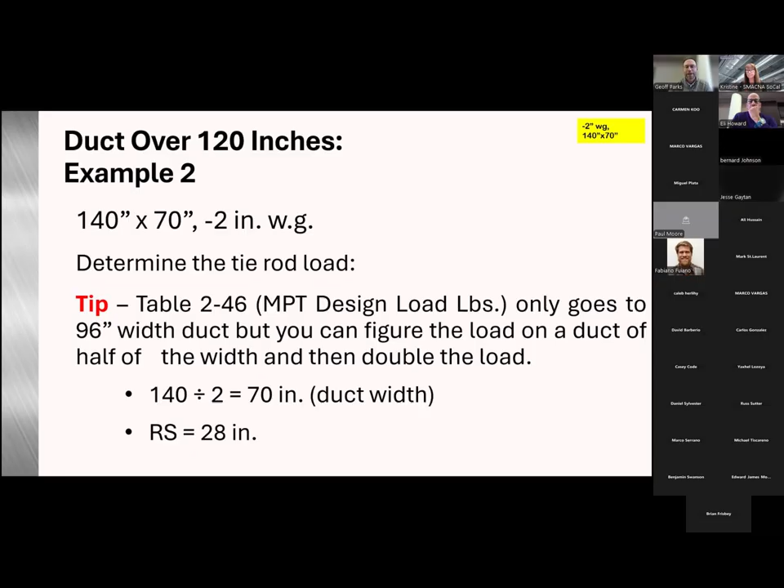Tie rod load, for this one, we would look at the table - we could either calculate it manually like we talked about, use the tie rod worksheet, or go to the tables, and while it does max out at a certain size, you can take half of the duct width. For this instance, it would be 70 inches. Then we could calculate the tie rod load based on a 70-inch wide duct at reinforcement spacing of 28 inches, and then multiply that by 2 once we got that number.

So when we jump to table 2-46, we're looking at basically 70-inch at 28-inch reinforcement spacing, which gives us 146. We would multiply that by 2 to get what the load is for the 140, which is going to end up being 292.

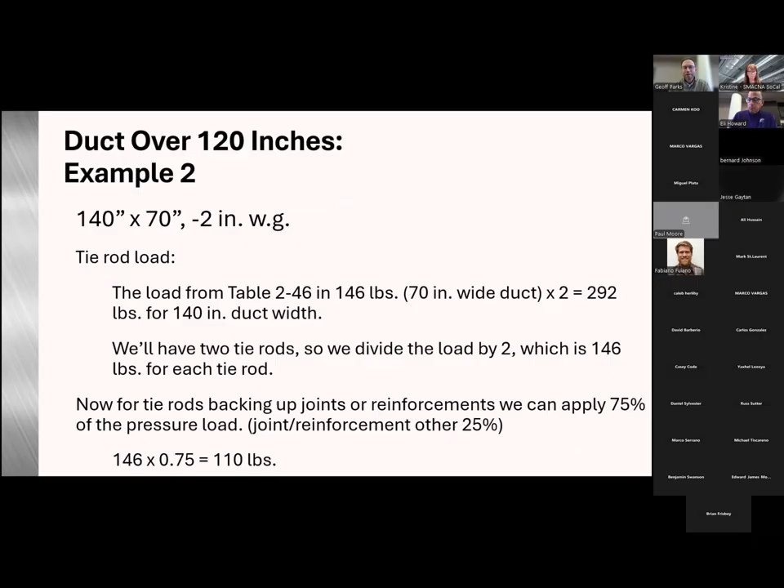Let's see here, skip - we're right up against our clock here. We're up against the clock.

So to look at sizing this tie rod, I wanted to show that, hey, 1/2 inch and 3/4 inch max out at 46-inch and 62-inch respectively, so those would not be options. So for this particular build, we would have to go to the 1-inch, 70 inches, 831 pound load. So this one would meet both the load and the length requirements.